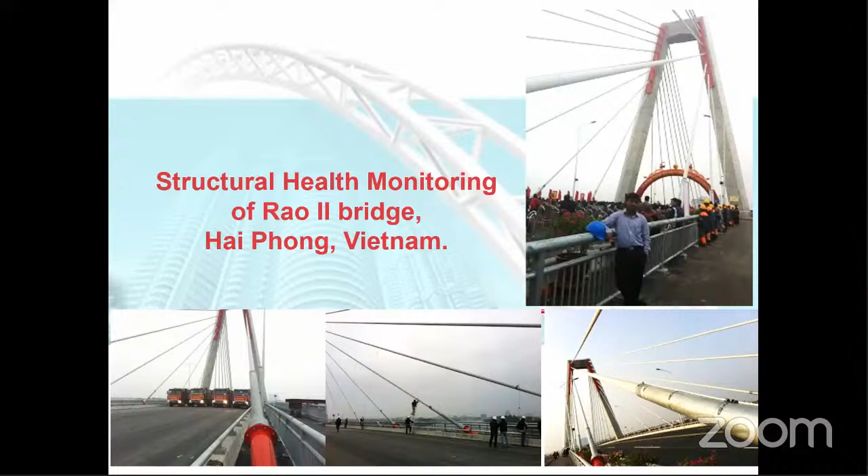So a few of the projects I've listed are the structural monitoring of Rao II bridge in Hai Phong, Vietnam, the online monitoring system for the Golden Horn Bay Bridge crossing in Russia, health monitoring of the Neva Cable Stay Bridge in St. Petersburg, the new Mariinsky Theater in St. Petersburg, and the Crusell Bridge in Finland.

A few projects in India are the load and periodic monitoring of road over bridge OB161 in Baramulla, Jammu and Kashmir, structural monitoring of a steel truss bridge with a 120 meter span at Mangalore, Karnataka, and load testing of the viaducts of metro projects to evaluate dynamic augmentation coefficients.

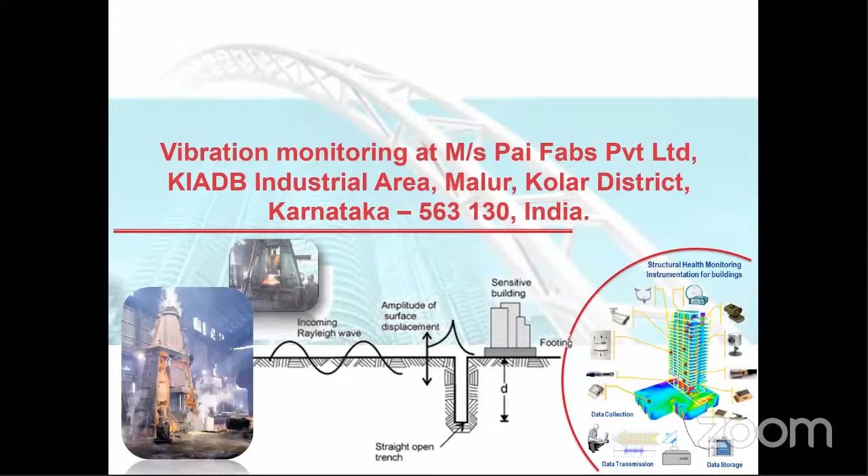Various other vibration monitoring in various industrial areas - Kolar, Bellary, and other places in Karnataka - and a few measurements abroad on human comfort.

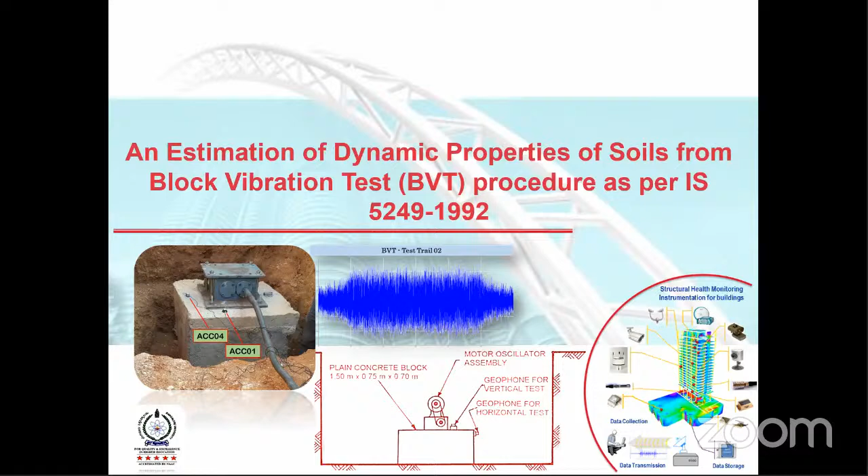It's a big business across the globe. Someday, maybe if there is one more opportunity, I will talk on this - and vibration monitoring on the effect of flow vibration due to moving vehicles on sensitive equipment in the neighboring country.

So these were a few of the projects which I could list, and in case any clarifications or suggestions are required from the participants, I would be happy to share, not just limited to this presentation, but those projects also.

So today's presentation is going to be on the structural monitoring of a bridge, specifically a case study on the significance of monitoring temperature and humidity. The outline is going to be: introduction, structural health monitoring, benefits of structural health monitoring, case study on the significance of monitoring temperature and humidity, and some closing comments.

Although the outline looks very simple, my presentation is going to run at least 2 hours long. I hope the hosting organization and department organizers would accept such a long presentation. In case at any point they require me to end, kindly let me know, and I will definitely wind it up at the earliest.

Now, as we all know, the civil industry is evergreen and ever growing. We basically build what we call the living companions to all. Now, during this COVID situation, you would have understood that the only thing that is going to be forever immortal is our civil industry, because your building is going to stand, but humans are always mortal. Civil infrastructure and construction technology have evolved over centuries, as we all know.

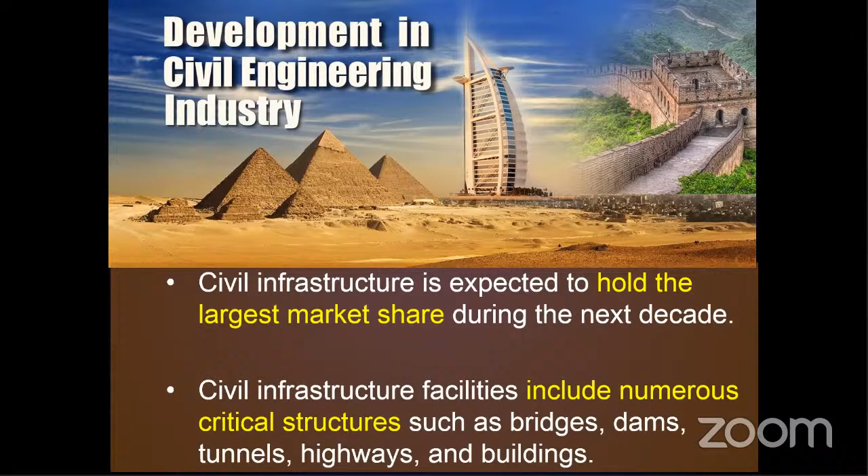So therefore, the infrastructure sector is the key driver for the Indian economy, or any other economy. Civil infrastructure facilities, as we all know, can include numerous critical structures such as bridges, dams, tunnels, highways, and buildings. Now, in the construction industry, presently we are in a state where, because of rapid urbanization, there is a need for new construction, and there is a need for retrofitting existing structures. Basically, we either need to construct new ones, or we need to take care of the aging infrastructure.

As we all know, we've been professors explaining students about most of the modern complex designs, and the structure being so complicated with a lot of materials inbuilt. The recent development in technology has enabled modern construction of structures that consist of most complex design, such as complex geometry and conditions, incorporating complex systems such as control devices, composites, built with advanced materials.

Built with advanced material quality and supported with sophisticated analysis, design, and rapid construction. All these modern constructions or infrastructures are subjected to aging, and also subjected to traffic volume.

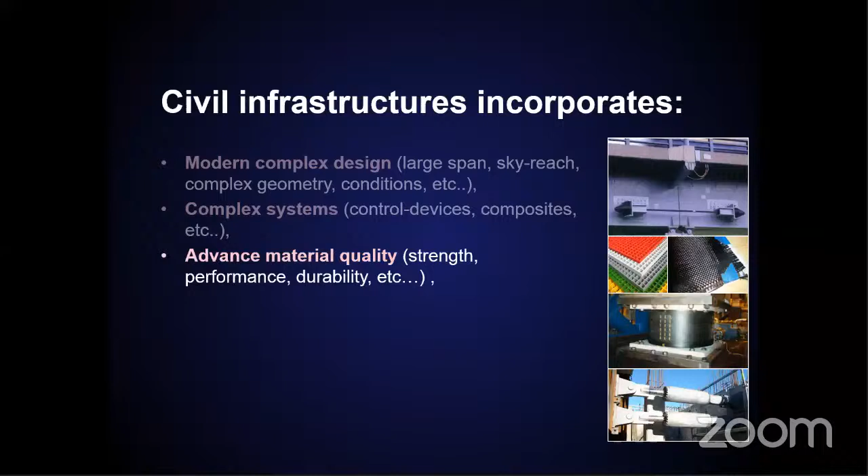You can mute him. Okay, he has muted. There is some audio a little low, it seems. Please check your audio. Okay, let me check on that. Is it fine now? Now it is okay. Yeah, fine.

So we've been able to construct the tallest buildings and the large span bridges. We are almost reaching 2-3 kilometers span of the bridge.

Now, as you all know, the globe is getting hotter day by day, and the temperature is rising. This is attributed to global warming and climatic change. This is the present day talk.

It is necessary for us to know the terms weather and climate, and these are quite different. Weather events are defined as a state of the atmosphere in a particular location at a particular time, whereas climatic change includes major variations in temperature, precipitation, wind patterns, and other environmental conditions that occur over several decades or longer. It takes more time. So that's climatic change.

Now, the climatic change is the cause for the structures to be affected, and the climate is changing because of global warming. The change in climate and weather are linked over the long term, but no single weather event, such as what we had recently, the tornadoes or the cyclone, can specifically be attributed to the changing climate. So one single weather event cannot dictate the climate. Basically, it takes a long time.

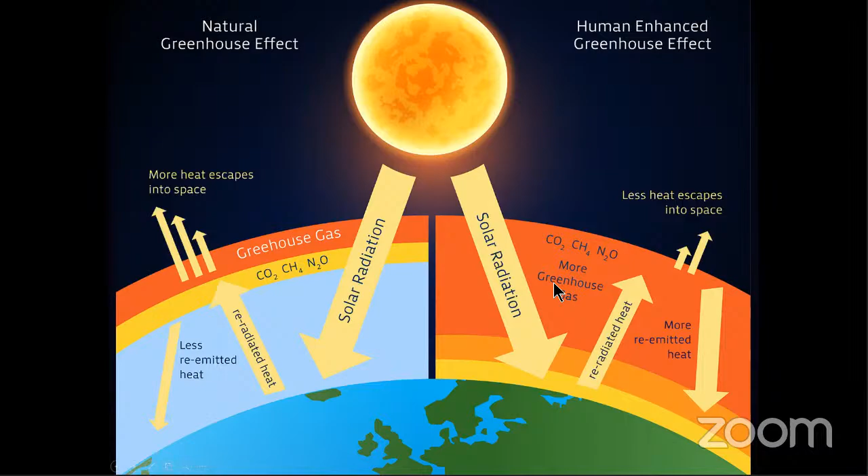Now, if you all know Arrhenius, he was basically a scientist. In 1896, he first speculated that the change in levels of carbon dioxide in the atmosphere could substantially alter the surface temperature through the greenhouse effect. He also warned that if burning coal would double the concentration of carbon dioxide in the atmosphere, the temperature of the Earth could rise by several degrees. That was the definition of enhanced greenhouse effect, the day we got to know this.

So if you can see, the sunlight passes through the atmosphere and warms the Earth. The second is infrared radiation given off by the Earth. The third is most of it escapes to outer space, allowing the Earth to cool. But some infrared radiation is trapped by the gas in the air, that is carbon dioxide, keeping the Earth warm enough to sustain life. Therefore, increasing carbon dioxide increases the amount of heat retained, causing the atmosphere and the Earth's surface to heat up. So this is all about the greenhouse effect and the enhanced greenhouse effect.

So thereby, we have a problem of climatic change because of global warming. Now, as you all know, every sector, industry, or organization is contributing to the greenhouse effect.

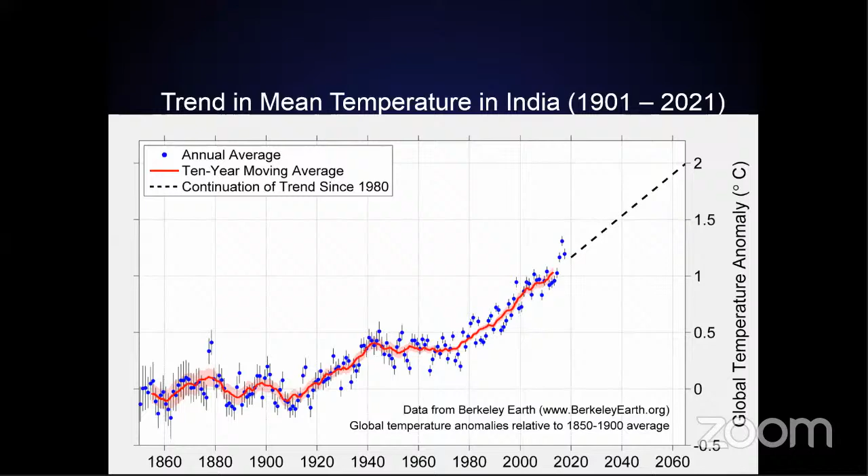This is in context to my presentation, so this basic understanding is important because we are into structural health monitoring. In health monitoring, it's not just about finding how much change has happened, but also getting into action mode, where you diagnose the problem and then suggest something. So understanding why the problem started is of prime importance.

Because of the enhanced greenhouse effect, the carbon increase, and the carbon footprints from each and every sector, we have a rise in global temperature, and thereby various effects. On the global scale, the temperature is increasing. Carbon dioxide is also increasing, which is a major pollutant, and there is also increasing acidity in the ocean water.

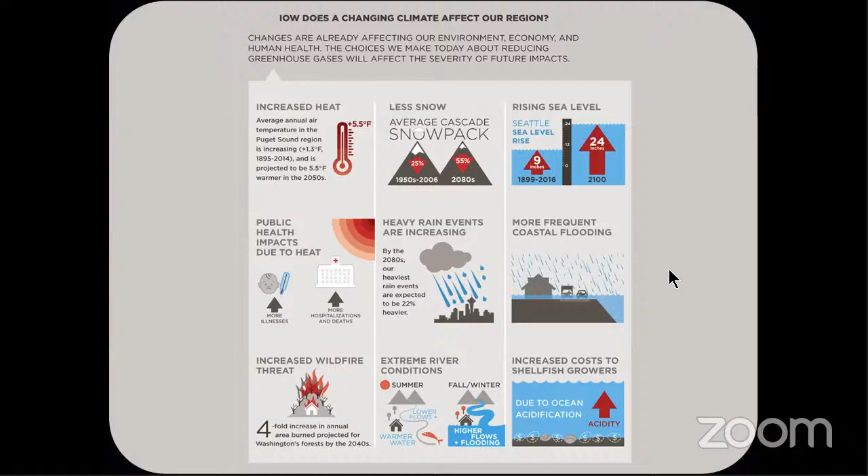So what would be our future? Because of this change, there will be lots of effects on various sectors and surroundings. There will be a lot of flooding, low snowfalls, and record temperatures. Fire risk can increase, along with landslide risk, poor air quality, and a lot of food-related illness, so airborne diseases and other issues would increase. As we all know, in the present COVID situation, that too is now being declared as airborne.

This is going to affect various regions, and there is going to be risk for various sectors, that is environment, economy, and the health sector also. There is going to be a huge increase in risk involved in cost, and this would be ever growing.

We all know that because of temperature, there's going to be severe drought. Because of water and temperature, we have extreme precipitation events and coastal flooding. And because of temperature, there's going to be heat waves. We have the strongest evidence because of scientific findings. There is also some evidence on water plus temperature causing tornadoes and hurricanes, which has been extensively studied in recent days.

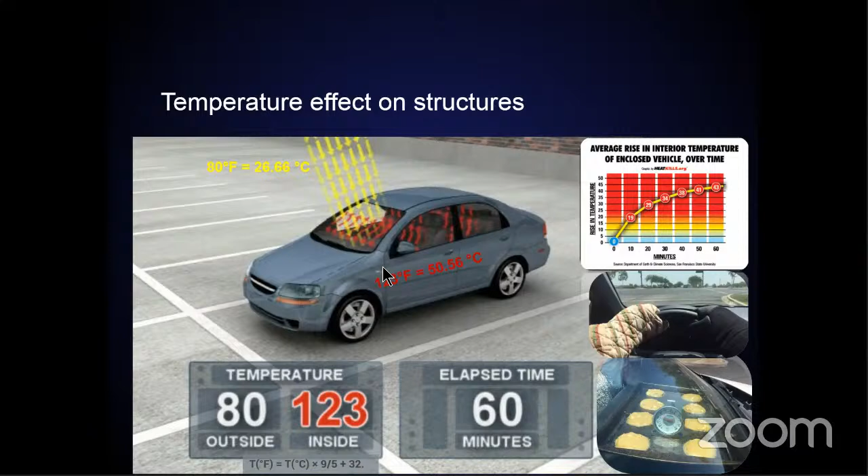Today we are in a situation wherein the temperature is quite high, and there were a few things floating on social media about cars getting melted in a few countries—various components of the car being melted. If you fact check that, it's just damage caused close to a construction site which was subjected to some fire. But still, from a civil engineering point of view, whenever there is a fire in an adjacent building, it's going to affect the building next to it.

So although the news is fake, it's an eye opener for civil engineers or structural engineers—when a neighboring structure is affected, definitely you're going to be affected too. That doesn't mean it was just gossip or something, but you need to keep yourself safe and in check.

Because of various phenomena—the enhanced temperature or harsh environment—and because of the aging factor, these two factors cause infrastructures to deteriorate. This is not just a problem specific to one particular nation, but it is a problem across the globe.

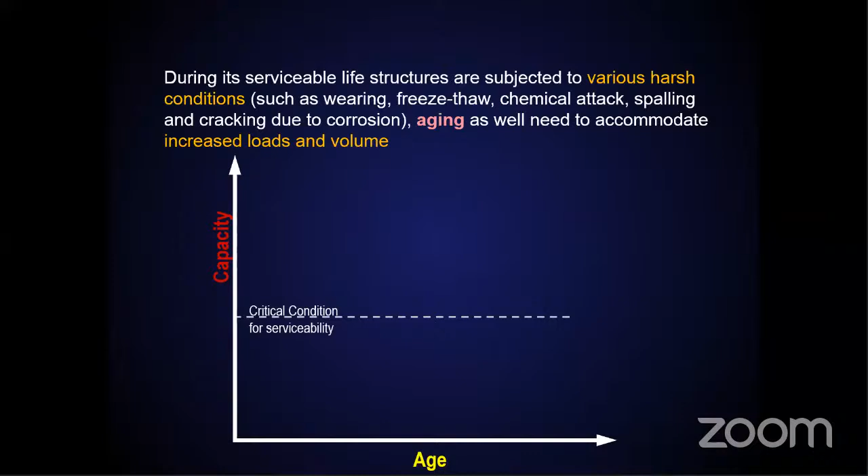Aging is definitely a slow process that also deteriorates structural capacity. The loads clearly show a tendency to increase over the lifetime of the structure. However, if the applied load increases continuously, the deterioration would occur faster. So if the load increases in an accelerated way, the deterioration is also going to be accelerated, or get faster.

The load is never constant, and the capacity is never constant, because capacity decreases with age and also on the rate of loading—it is always changing. Whereas the load is always variable, totally uncertain. So whenever there is variability and uncertainty, these parameters can be best represented by the probability distribution.

So on the probability distribution curve, if you take any point, as time progresses, the demand exceeds the capacity, and it is evident that the time-varying probability of failure increases.

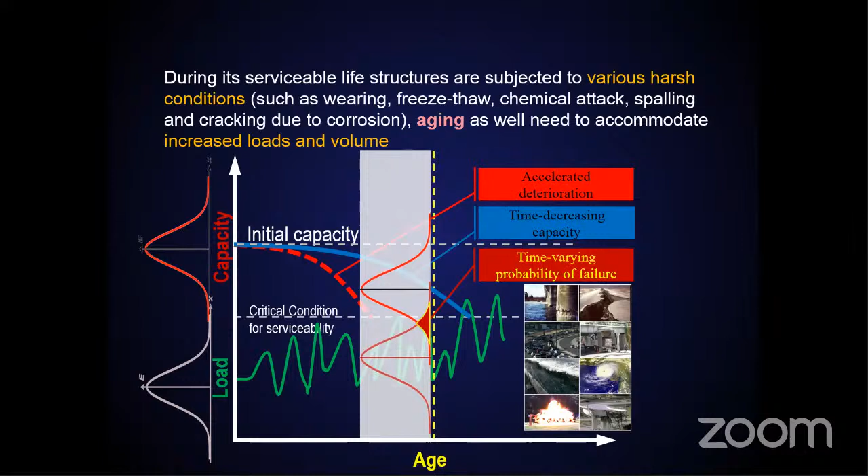The design must guarantee the performance—that is the functionality, strength, and durability—which is dependent on time. Structures in general are intended to perform safely during their design period. When a structure enters its service, it is close to perfect, or in agreement with the engineering expectations of the day. Over time, the structure loses part of its initial capacity, and there is going to be cumulative damage over a period of time.

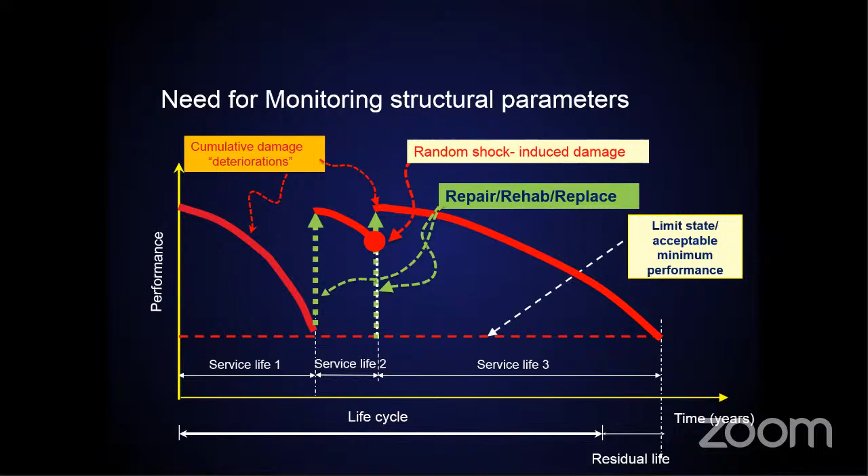As you can see, there is numerous uncertainty involved in every phase. So what is that uncertainty? The X and Y parameters. If you look at the X and Y parameters, you are not definite at what time the rate of deterioration would lead to the decommission of this particular structure. On the Y-axis, what we have is the performance - we are not aware up to what point it will perform after it is designed, and the rate at which it falls is also uncertain. There is total uncertainty.

So in order to extract knowledge on understanding, or to understand how this deterioration takes place, there is a need for information. This information is basically obtained from data that are collected from these structures. In the present day, there is reactive based maintenance, which is still a reality. The preventive, or the time based, or condition based is still not being practiced - in a few cases it has been practiced, but not completely.

The predictive or forecasting based approach is still the need of the hour. So all this predictive, or forecasting based, or condition based approach is dependent on the data that is acquired and the information that is obtained in context with that particular situation. Now, therefore, there is total uncertainty.

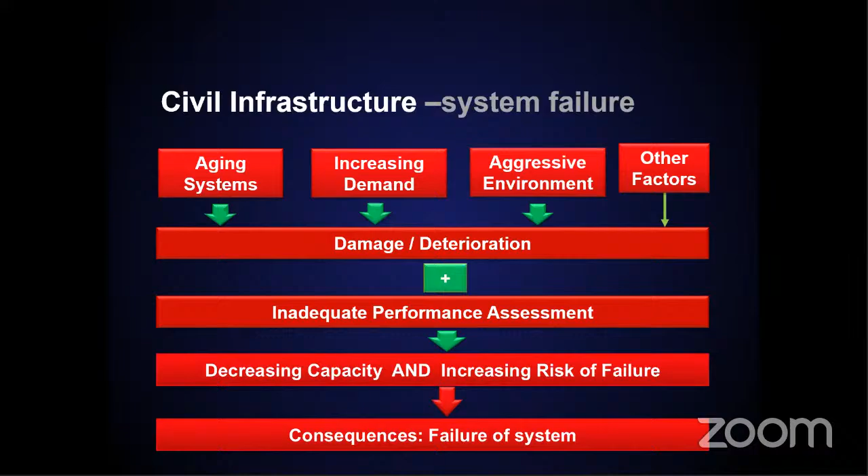Now we have to understand what is the failure of a system. If there is low uncertainty or every factor is taken care of, the failure of a system could mean the suboptimal performance of a system. If the uncertainties are not accepted or considered, and various factors are affecting the structures with inadequate performance assessment and a huge risk of failure, we say the system can also collapse, or there could be extreme failure of the system. So the definition of failure of a system depends on that particular situation.

Now, as you all know, for any engineering problem, obtaining reliable data is always the first and fundamental step towards finding a solution.

Now what we need is more information, and with information we get knowledge to understand the failure. The failures that are already there, or the failures that we have understood over a period of time, and their analysis will also lead to new insight and help us improve designs of future structures.

Now, monitoring structures, which is the present day talk of mine, using sensor technology is one way of getting quantitative data about the structure and other parameters that encompass the uncertainty, and help us take informed decisions about the health and destiny of the particular structure.

Now, as I said, structural health monitoring is an emerging vital tool to help engineers improve the safety and maintenance of critical infrastructure. The objective is to lower the maintenance cost and increase the reliability of the structure.

Basically, it's presently been accepted by the majority of the civil engineers fraternity as a potential method of assessing the condition of the structure. The development of structural monitoring technology is basically for surveillance, evaluation, and assessment of existing and newly built structures, and it presently has attained some maturity, meaning extensive research has been conducted and it is being implemented on site.

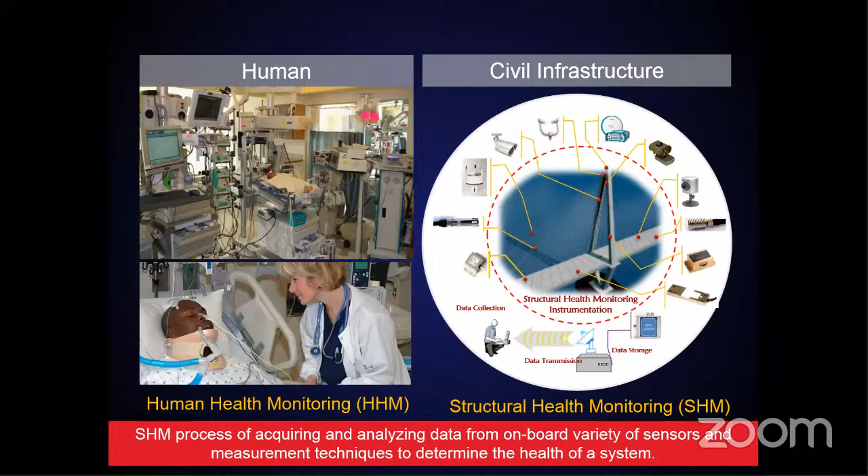Nowadays, everybody is aware of what is meant by monitoring, because we've been constantly monitoring people, and the media is helping us monitor. Even if you're in a very bad state or a good state, you try to monitor so that you are always in a positive state of mind.

Now, as you all know, the parallelism between medical activity and SHM is that there are different phases of life. The birth monitoring, during the birth you go for monitoring, and that's called process monitoring. Health checkup, regular routine health checkup, whether you are in sound health or not - the same type of monitoring can be done. And when you're in deep illness or close to death, there is something called clinical monitoring, and there is a damage monitoring when it comes to the structure. So that's the parallelism that could be understood from the medical activity and the SHM.

Now, the benefits of SHM are various. You can look into various literatures that give you the benefits, but I've tried to bring a few of those so that those people who are very new to SHM could understand. I've made my presentation in such a way that all are benefited, from students to those in the advanced levels of understanding monitoring.

So monitoring reduces uncertainty because it takes care of various parameters that have been monitored. You can also discover hidden structural reserves that were not taken care of in the designs, discover deficiencies with time, and increase safety. This can help buy some time as well as increase safety.

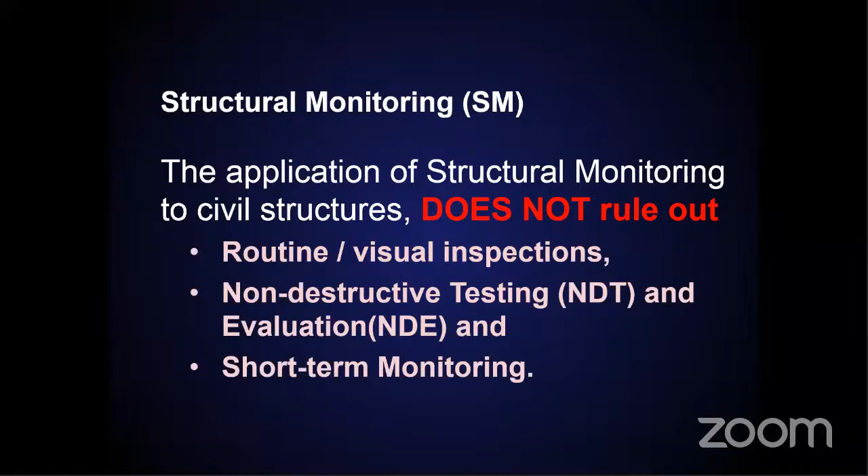Now, the application of structural monitoring to civil infrastructure does not rule out the routine things presently practiced in the industry — that is, visual inspection, non-destructive testing and evaluation, and short-term monitoring. There are various terminologies presently noted by various industries and extensively used by people, but all mean the same, and each has its own specific objectives.

And the terminologies are non-destructive evaluation, structural monitoring or measurements, structural health monitoring, condition monitoring, and damage prognosis. Now, each monitoring project has its own peculiarities, and although it is possible to standardize most elements of the structural monitoring system, each application is unique in its own way, and they are combined.

So since every project is unique and peculiar, you try to combine these and make the topic. For example, in the present topic, I've made it structural health monitoring of structures and the significance of monitoring temperature and humidity. Therefore, that doesn't mean I'm an expert in the various other fields.

It doesn't mean that I am also aware of other things. This particular field has its own wings. The few people who have worked on certain projects could only talk on those projects and would be expert in that project. But it's quite a complex and vast subject. So whenever you get involved in a particular project, you try to know much on it, and it gives you a basic idea of the other monitoring schemes.

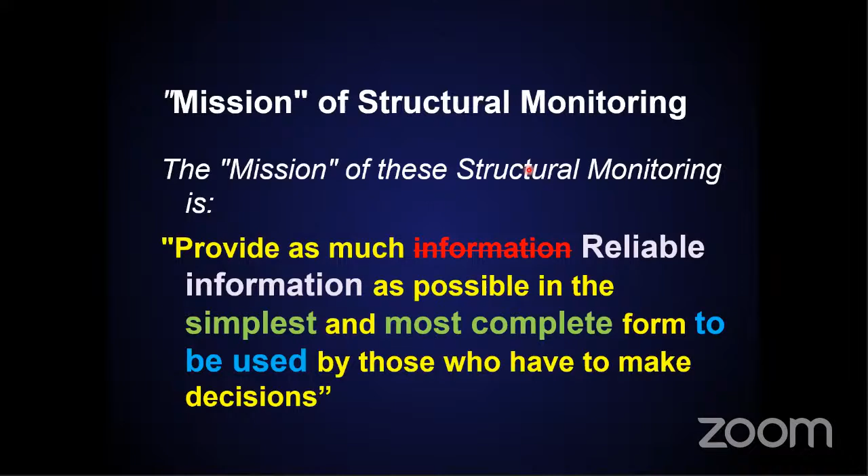So therefore, now what we need is not just information, but reliable information from a reliable source. You need to also have the reliable system in place and expertise. I think that would help you understand the seriousness of structural health monitoring. It is not just to provide information, but to provide reliable information, as much as possible, in the simplest and most complete form to be used by those making the decisions.

Now, as seen from the previous slide about the health monitoring of a critical patient, the decision making may arise similarly in structural health monitoring or structural monitoring of civil infrastructures. And for that, the essential features of a structural monitoring scheme, or structural monitoring technology or devices, includes...

...reliable and economical instrumentation. That's prime important, because economy is the most important thing that allows wide implementation of the instrumentation. Accurate signal processing, expertise with knowledge and skill in the information process. The success and effectiveness of each tool for the project depends on the availability of reliable data. So although you have everything in place, we still need reliable data. That also plays an important role.

So on the whole, you need to have the best things in place, and not just knowledge, but also the skill sets. Now, the components of the structural monitoring scheme, I would try to go fast because these are the basic things. So from henceforth, I'll be a little faster. I'm getting back to my case study and I'll go slow over there. So now, as you can see...

...the modern structural health monitoring system will typically consist of six common components: the structure or system that needs to be monitored, the sensors placed onto the system, the data acquisition system that acquires data from the sensor, the data transfer and storage, the data management, data analysis, and diagnostics.

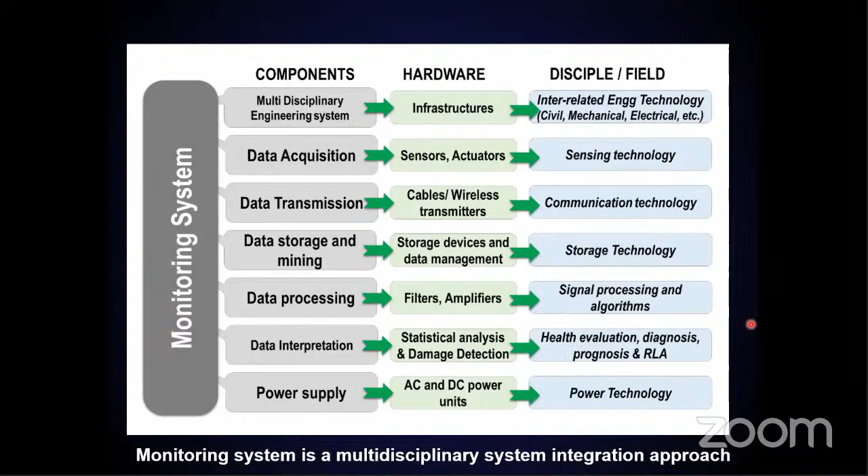Now, the first component is the structure. Most of the questions that will be asked is which of the structures can be monitored. As I told, having been presenting in various conferences, I've been asked to define a few of the basic things, so I try to include this.

So practically, we can monitor any of the structures, be it new, old, micro, macro, or to any scale. It could be on Earth or in space. It could be a single structure, a complex set of structures, the whole city, or anything. It could be a temporary structure or a permanent structure. So practically any structure can be monitored.

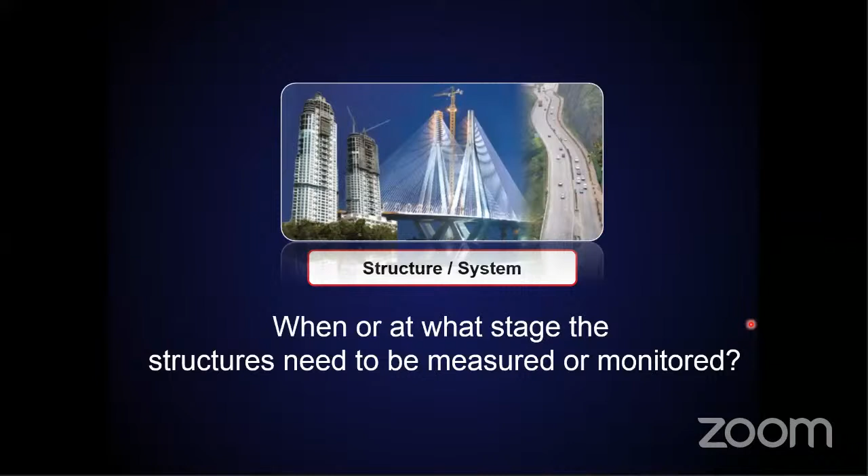At what stage do we need to monitor? As in the case of health monitoring, we can monitor at the happy stages, and when you're really worried, you go for diagnostics. Sometimes when you're critically ill or in a very bad state, you go for monitoring.

By the same analogy, you can monitor structures at any stage, beginning from the design stage, model testing stage, construction stage, commissioning stage, in-service stage, maintenance stage, retrofitting stage - before and after retrofit, to check whether the retrofit is effective or ineffective - and the mobilization stage, when you mobilize a structure from one place to another or lift it from one level to another. You need to monitor every component if there are any stresses induced, so you monitor before and after it's mobilized.

For demolition, whenever you go for a demolition, you need to see whether the surrounding environment is affected, whether the structures surrounding it are affected. Therefore, you need to monitor before and after the demolition.

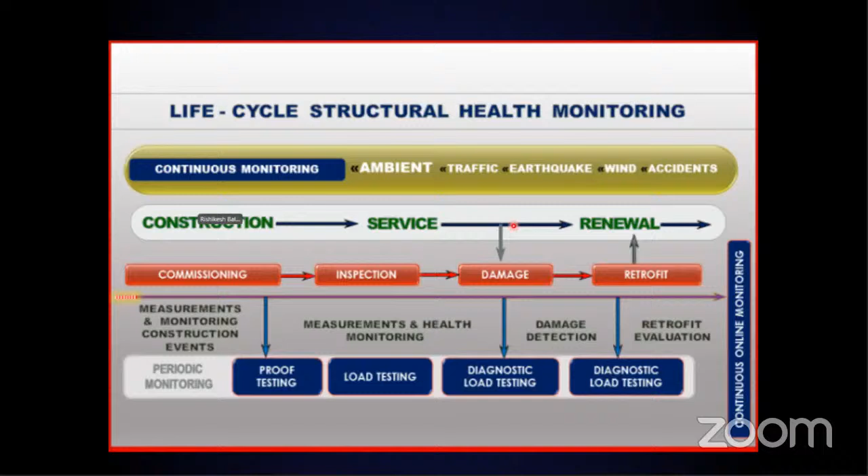Now, which of the components or sections of the structure need to be measured? You can measure the whole structure, or you can measure one component of it. Measuring the whole structure is called global monitoring. When you consider a portion of a structure and monitor it to understand its local behavior, that's called local monitoring.

The second thing is sensors. What is a sensor, or what types of sensors are available? Electronics students are very much aware of it, and nowadays every individual knows about sensors because of smartphones, which have various sensors. By definition, a sensor is a device for sensing a physical variable of a physical system or an environment.

Sensors are there to collect data. They sense changes in the physical variable of a system or environment that could lead to damage. Understanding damage is very important. Damage is defined as a change introduced in the system which adversely affects its optimum functionality, either currently or in the future. So damage is basically a change introduced into the system that adversely affects optimal functionality, whether it's a change in material property, geometrical property, boundary conditions, or system continuity. The sensors sense the data, and the change in that data defines the damage.

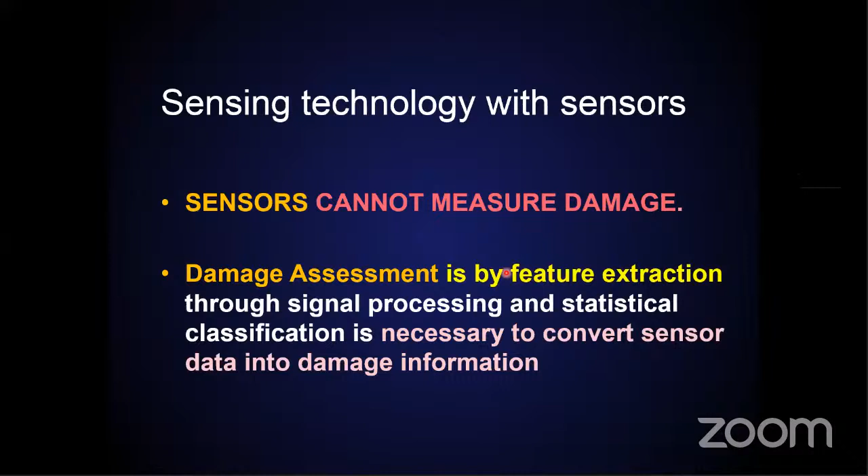Sensors must fulfill the A to E characteristics, as follows: Accuracy—the sensor should be reliable and accurate. Benefit—it should have the benefit of being economical, cost-effective, and compact, as small as possible. Durability—the serviceability of the sensor should be durable. Express—meaning the data operation and accuracy should be fast, high rate, and provide real-time measurements. And once dealing with civil infrastructure, it should also have an adequate service life equal to that of the infrastructure.

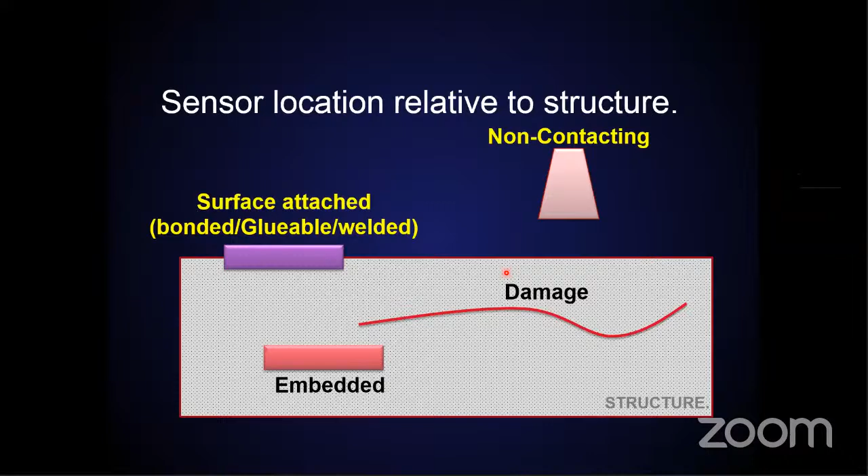The types of sensors available in the market can be classified as surface attached—which could be glued, bonded, or welded—and as contact or non-contact. So you have contact sensors which are surface attached, and some are embedded, or embedded at a specific region, such as at the site of damage, expansion, or a crack.

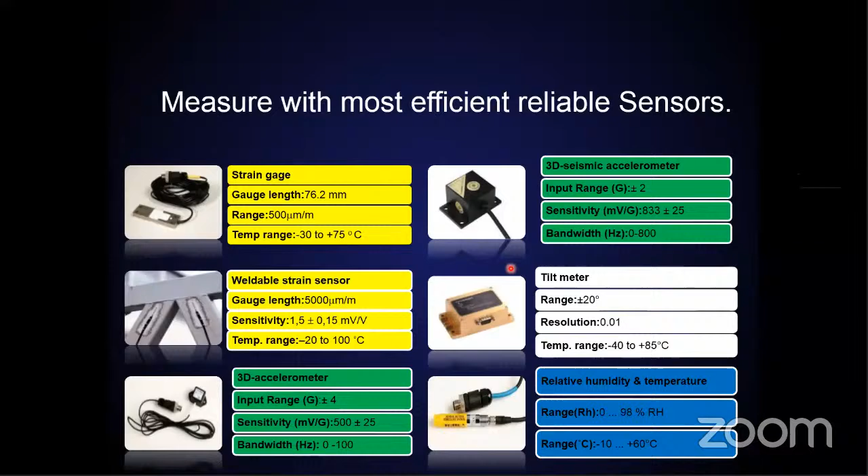The conventional sensors are electrical signal based, basically traditional electronics based. They are surface bondable, gluable, weldable, clampable, boltable, concrete embeddable, and composite embeddable. These are the conventional type of sensors available from various suppliers, and these are a few of the sensors I've been using extensively in my earlier projects.

Now, the conventional sensors have limitations in evaluating the long-term behavior. They are very sensitive to electrical noise, and this noise doesn't allow you to understand the signals properly coming from the sensors, and this is always an issue. Also, these sensors degrade with age, and presently fiber optics are identified as the most suitable for health monitoring of structures.

As you all know, the telephonic lines are being converted from conventional lines to fiber optic lines. The flow of data is quite reliable and fast, and the rate of data transfer is also increased.

Now, the advantages of fiber optic sensors are electromagnetic interference immunity. Basically, electromagnetic radiations do not interfere and do not create any noise. It is lightweight and very small, as you know, very small in size, like a hair.

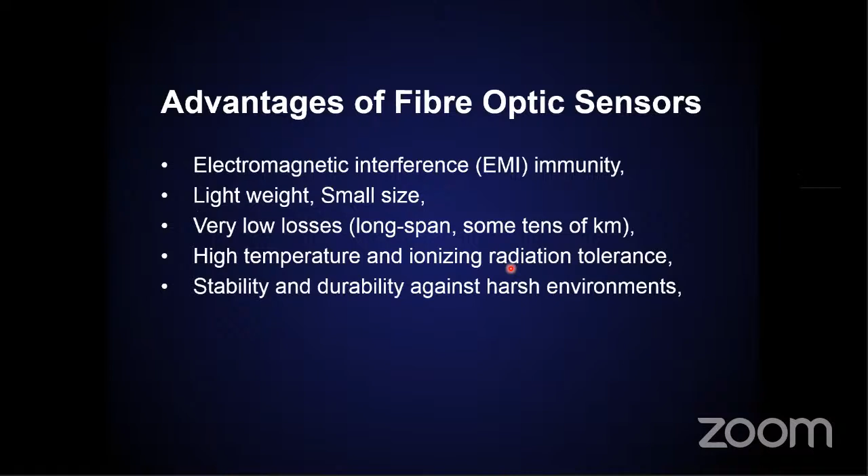Very low losses over long spans, maybe going to tens of kilometers. High temperature and ionizing radiation tolerance, stability and durability against harsh environment, no local electrical power required at the measurement point, high resolution, high bandwidth of signal, and high sensitivity.

So fiber optics are also commercially available these days, and they are also classified based on surface bondable, gluable, weldable, boltable, clampable, concrete embeddable and composite embeddable. Based on your particular situation or project, you may have to define what type of sensor you require, and there are suppliers who will definitely suggest or help you understand the sensor and its limitations, as well as give you the right consultation.

Now, how many sensors to be installed is one more question. It depends on the requirement, and it also depends on the budget and the time. The budget always depends on the resources, and the resources include the materials, the people involved, and the time involved. So the higher the resources utilized, the higher would be the cost.

Because the data coming from the monitoring scheme is going to be humongous, very large. So the definition of the levels of sophistication can be described in various levels: level 1, level 2, level 3, level 4, and level 5.

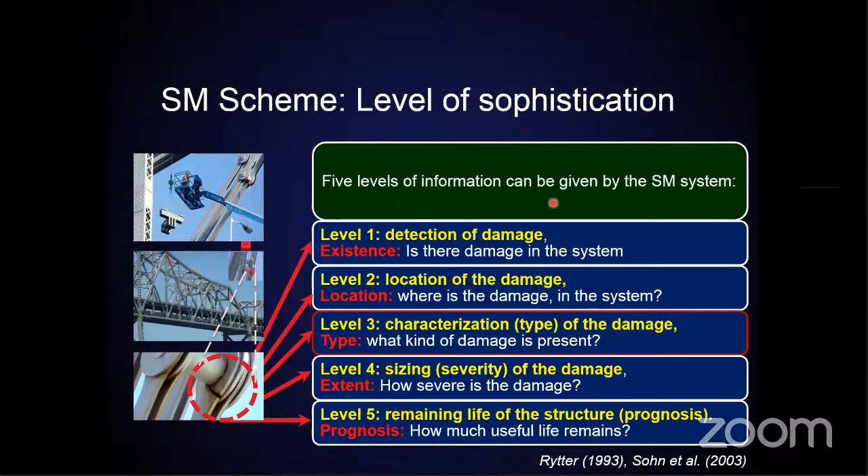So now you can see most of the bridges that have been worked on are in level 1, and a few are in level 2, but definitely not practically. I've never worked on a structure that goes to level 3.

Today we can afford to deploy few sensors onto the structure because of reliable sensors, but the number of cables and resources required for structural monitoring makes it a huge task given the limited budget. With very few sensors at level 1, you can just get an indication of whether there is damage within the structure, a little warning on whether the structure is performing or not performing. It could give you an answer to that.

Whereas when you want to put more sensors to get a more complex analysis of the structure, the level of analysis is quite high, so the number of sensors goes up, and more advanced algorithms are required. More data comes in, and it takes a lot of time, which becomes a costly affair. Definitely this is a doable job, but it depends on the situation where it's required, and the need for it.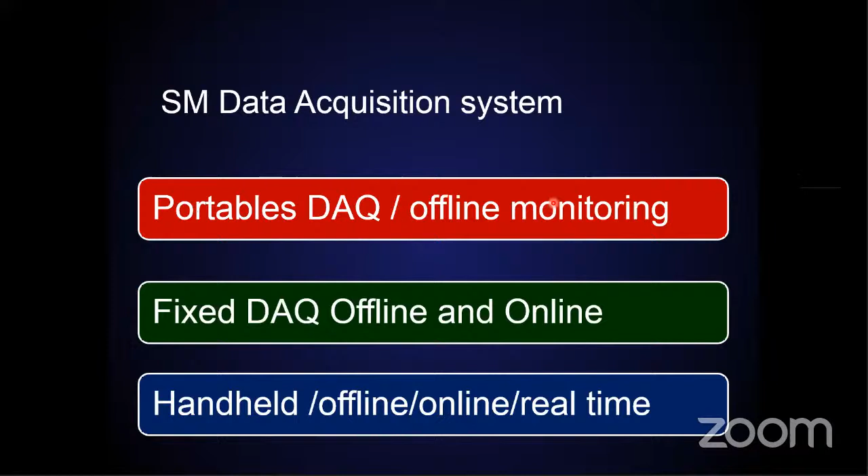The third component is the data acquisition system. Data acquisition can be classified as portable, fixed, and handheld, or defined as online, offline, real time — these are the various classifications. In the market you get data loggers, data acquisition devices, and data acquisition systems. The classifications and their benefits are shown here, but I'll skip these slides and just introduce you to the systems.

These are a few systems that are portable, handheld, and online monitoring systems permanently installed onto structures — I've been working with these systems. Data transfer always happens through cables and the network of sensors. Sensors are networked to the data acquisition system, which, being centralized, will also transfer the data to remote servers.

Basically you have a centralized data acquisition system with a parallel connection to the sensors, and this type is used in labs and small projects. But for large projects, with a minimum of 20 or maybe 10 sensors, the number of cables running onto the bridge itself becomes quite high.

If you're monitoring a small, very flexible system within the lab and trying to monitor damping, because of the weight of the cable and the sensor itself, you won't be able to get accurate results.

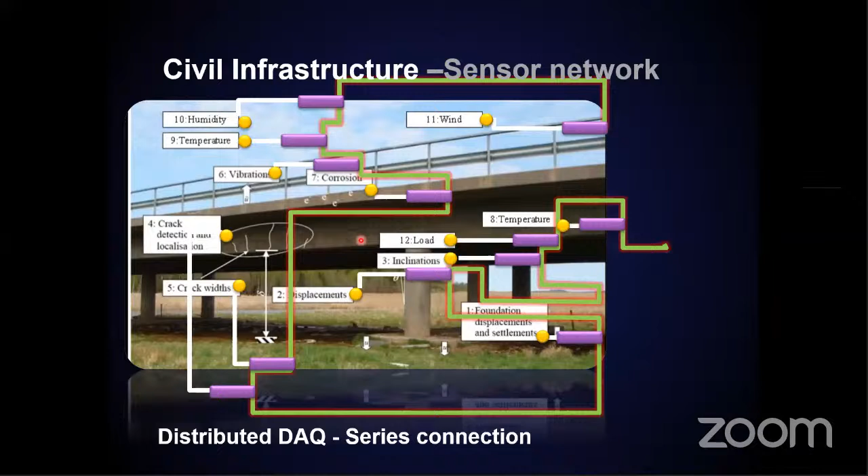This type of instrumentation has been developed, and now there's also wireless technology, where at every sensor you have a node, or a distributed DAQ or data acquisition unit placed very close to the sensor itself, which transmits the data to the remote server or remote station.

Therefore, the data gets stored. You can have various types of networking — it could be cabled or wireless, and there are different types of wiring: fiber optics, normal coaxial cable, shielded or unshielded.

So there are various types of wired and wireless networks that have been extensively used, and you can go with various combinations of networking. Basically, these data are networked, and then transferred to the data acquisition system. From the data acquisition system, it moves to the remote station.

So there's the bus topology or series networking DAQ, which I previously worked with in my previous company, based on networking sensors in series, which has its own advantages and its own limitations. This was extensively used, and most of the projects I'm going to talk about today have used this type of networking scheme.

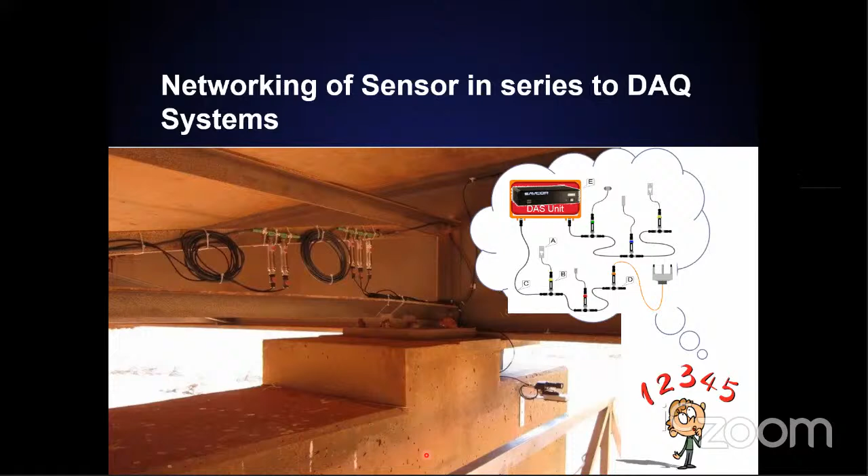This is inspired from the networking scheme in fiber optics, where in the fiber optic scheme you have multiple sensors in one single strand. You have multiple types of sensors, as well as multiple sensors in one particular strand, and that can be monitored over a long run.

So how much data is collected? As you all know, we have two situations presently in structural or civil engineering infrastructures. First, the structures are very large, so the number of sensors is going to be quite high, and because of that, we have a large amount of data coming from sensors spread across the whole infrastructure.

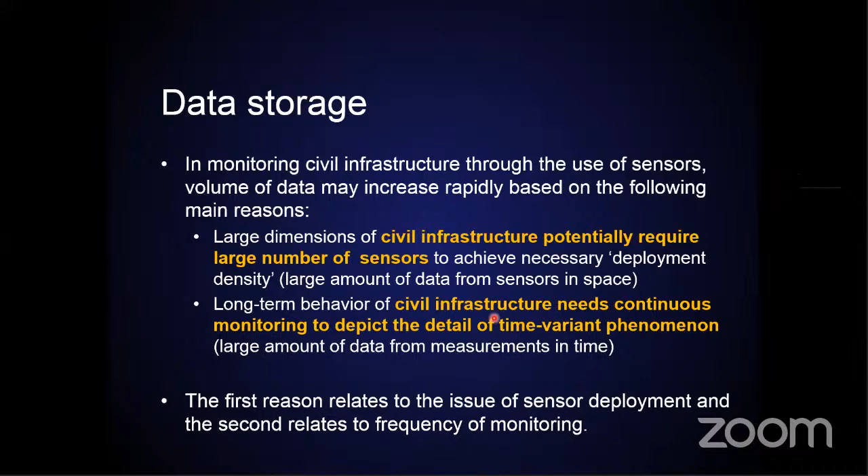Now both of these raise two issues. The first relates to sensor deployment, that is, more sensors deployed onto the civil infrastructure. The second relates to the frequency of monitoring - we need to monitor continuously at a particular rate, and the data has to be collected for a longer duration. So how much data is stored?

That's the huge thing. These days we're in 5G technology, and data transfer is almost 100 times compared to 4G. But where is this data transferred? Your phones these days have much more memory, and photography resolution has increased - you have a 48 megapixel camera storing each picture at about 13 MB or so. Similarly, when you have a high rate of data, meaning high resolution data, the number of data points transferred per second is high. Therefore the storage also increases, and humongous data storage is required.

So for data storage, if we take a present day situation, the maximum bit depth is going to be 24-bit, though practice in labs is usually 8-bit or 16-bit. Here we have high resolution bit samples of 24-bit. Let's say there's one channel - x-axis vibration data - being monitored for about 60 seconds, and per second you're collecting 100 data points, called sampling. So per second you collect about 100 samples, and you can see how much data is being stored.

So I'm collecting the samples, 100 samples per second, and you can see per minute, every 60 seconds, that gives you 17 kilobytes, almost 18 kilobytes.

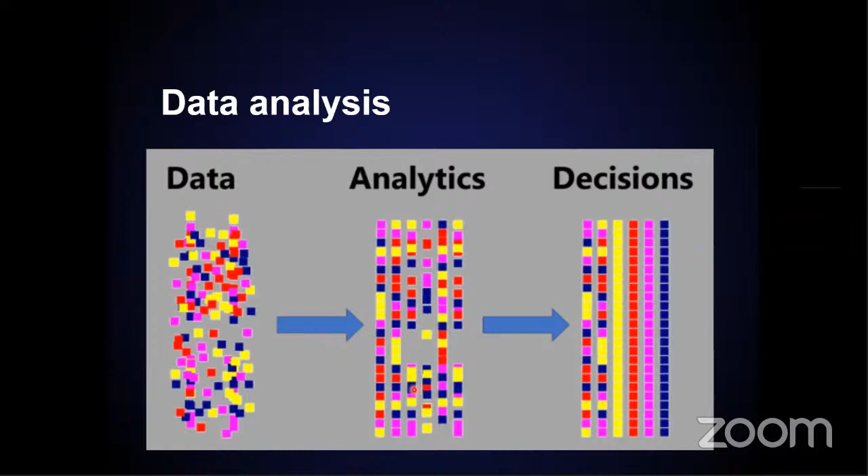That falls after analytics, into data visualization, which needs to be simplified. Your end user, or the people who are going to take decisions, or people who want to get into this business, like those looking into the seminar—I'm not providing you all the basic raw data as we did earlier, but rather data that is simple to understand, so you can make your own interpretation.

Many things come into play when doing structural health monitoring business. So next is data visualization. As I said, it has to be as simple as possible, and the large amount of data should be captured in the most simple way, so you get the most complete understanding of that particular situation.

Utilizing the structural monitoring tool gives you more time to focus on data interpretation, evaluation, and action, with less time spent acquiring it. With the traditional approach, you need to go onto the site and collect the data, then at specific intervals keep monitoring, a calendar check. You need people moving about getting that data, which takes up a lot of time. But these days, implementing structural monitoring schemes gives you more time for data interpretation, evaluation, and taking further actions.

So basically, let's say you have a particular situation where you need to monitor the temperature, strain, displacement, and speed. You will select a few sensors from an expert who is an expert in sensors, and you deploy that. You'll get a structural monitoring expert who will try to give you a complete package, and thereby you get the data on site, onto your particular server or drive.

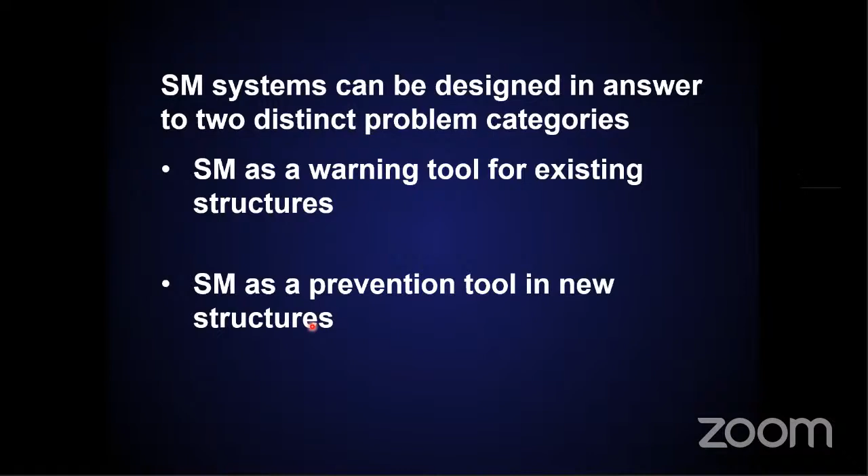So basically, the structural monitoring system can be designed to answer two distinct problems for the present day. It can act as a warning tool for existing structures if you try to provide these structural health monitoring systems onto the structures. So it works as a warning tool if it's already constructed, or for those structures still in a healthy state, it can also act like a preventing tool in new structures or existing structures. Therefore, these structural health monitoring systems can act as a tool, and this is definitely going to be the best way forward for the sustainable development of civil infrastructures.

Now, the significance of monitoring temperature and humidity. So now I will touch upon this particular topic. The temperature and humidity sensors are the most commonly used environmental sensors in any structural monitoring scheme. All this while I was talking about what a monitoring system is. Now I'm going to look into only two specific things: temperature and humidity monitoring. This is extensively used in most projects, and I've been using this particular technology way before.

Now, humidity sensors are also sometimes called hygrometers. Whenever you're monitoring structural parameters, you have two types of temperature in structural engineering or civil engineering: the ambient temperature, which is the surrounding or surface temperature, and the structural temperature. Structural temperature could include the core temperature or the surface peripheral temperature, that is the outer part. When the sensor is in contact with the body of the structure, then you are acquiring the structural temperature.

As you all know, climatic change is always rapid. The weather change, or the temperature of the ambience, changes drastically and is quite dynamic. Whereas the fluctuation of structural temperature is slower, and in the core it is relatively constant.

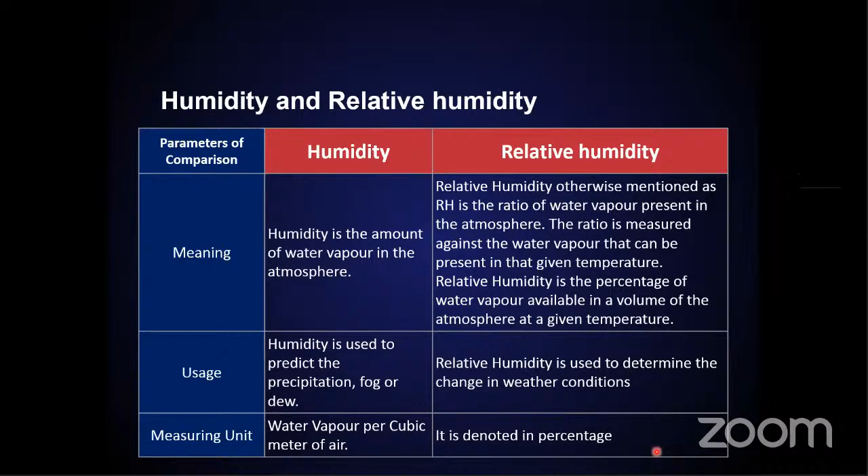So relative humidity, otherwise mentioned as RH, is the ratio of water vapor present in the atmosphere. Most of the time we monitor relative humidity, and it is used to determine changes in weather conditions. Humidity is measured as water vapor per cubic meter, whereas relative humidity is measured in percentage, and you will also see measurement in temperature.

During the COVID-19 situation, all of us have understood the importance of monitoring temperature. Thermal screening had taken place at every corner and every individual house. Thermal scanning at every security check and thermal screening are the first step to detect fever, and the first preventive measure towards isolation.

Once a case is detected, constant monitoring of the isolated person is important. So this is the importance of temperature monitoring. Temperature monitoring has really helped people understand whether they're COVID positive or negative, and how well they're coping when in isolation. This is what we understood during the COVID situation.

But if you look at the widely searched, extensively researched temperature issues during COVID-19 lockdown, one of the most searched things was the ideal temperature to cook chicken in the oven. Most of my friends who were locked at home during COVID knew the importance of monitoring their temperature when sick, but few of them were actually sick—they were quite happy being isolated. Yet the search engines showed that the most searched temperature topic was the right temperature to cook chicken in the oven, because most of them wanted to become good cooks.

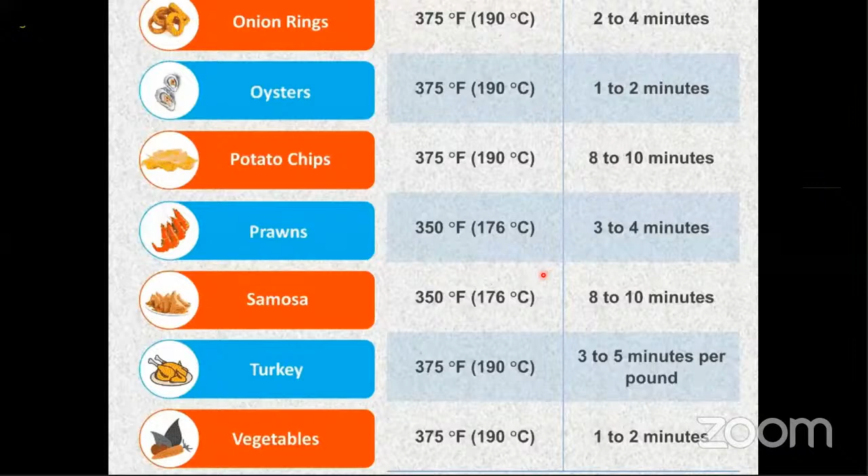I would emphasize looking into the importance given to temperature. When you cook at the right temperature, you get the right dish. If you don't cook at the right temperature, you won't get the right dish. Similarly, if you don't try to monitor temperature, you will end up elsewhere.

So temperature monitoring is very, very important. Now, temperature measurement is not new to a few of us. We were in the 90s, there was a movie called Predator. Temperature monitoring was done by these aliens.

The scanning of temperature was done by this alien on the captured human being, so it could sense, it had the infrared vision or infravision. So I will just run through the clip. You can see that in the COVID situation, as you all know, most of it were asked to go for the scanning, but this scanning is not new to those people who have seen this movie, so they would have understood.

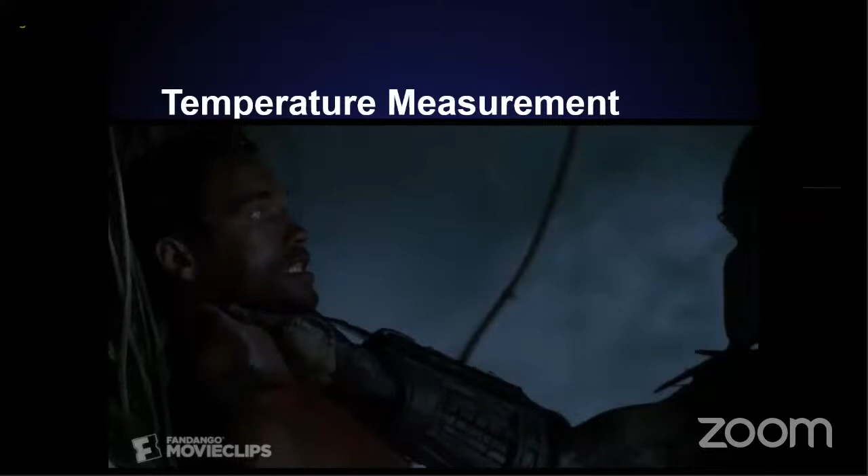So you can see that the person is captured who is not COVID infected. This is a movie in 1990s. You can see the alien is trying to scan, and that's the temperature scan of that particular person. Now, this is not new to us. So this is the way we wanted the scanners to be. So this was introduced in a 1990s movie.

Now, the present day situation is that initially few people were grabbed and they were scanned. And progressively, most of them volunteered themselves to be scanned for their temperatures. And presently, we are all automatically scanned for temperatures. That's the situation we are in. So slowly we are progressively moving towards automatic scanning for temperature.

Similarly, the structural health monitoring is getting automated, meaning sensors are implemented in the structures, and they're being automatically scanned over a period of time because of these low cost IoT technologies. Now, the monitoring devices and technologies have improved over time, and temperature measurement, which was earlier quite different, is now becoming faster, accurate, and smart.

Now, you can use your smart mobiles with an attachment to it. You can also screen the thermal ambience also. So this has been extensively used in various schools abroad and in most advanced schools.

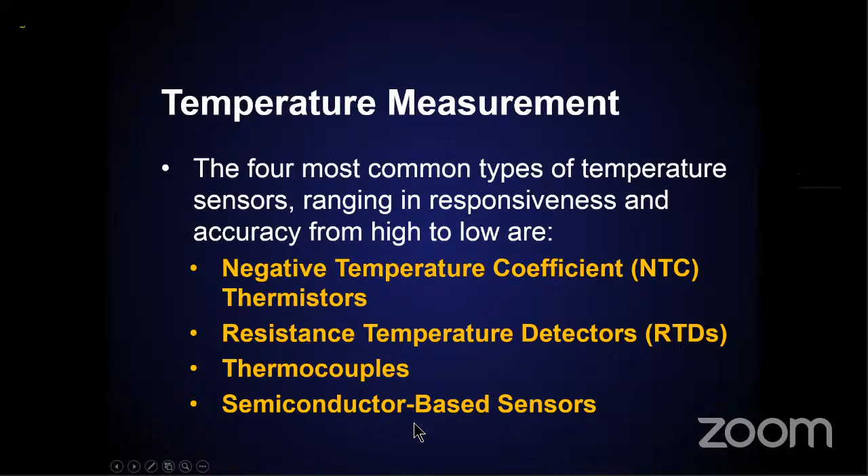So when it comes to temperature measurement in civil engineering, the most commonly used temperature sensors are those like thermistors, thermocouples, RTDs, and IC-based or semiconductor-based sensors. Now, the slides provide you the various advantages and disadvantages of using various types of temperature sensors, but the thermocouple and the thermistors are extensively used, as you can see, in most of the products.

Now, when it comes to humidity sensors, there are three common types. You can talk to some of the electronic guys or the sensor department, they'll give you a complete understanding of these and their limitations. So capacitive, resistive, and thermal based sensors are extensively available, and presently available in the market.

And the development of the humidity sensor is going at a faster rate. And you can see these are the data that I've got from those people who are working in this sector, and there is a huge development taking place on this particular sensor. So that has been extensively used, that is the humidity sensor.

So you have the various types of sensors. It could be optical based, acoustic based, and electronic sensors. So we see most of them are still in the development stage, and few of them are already in the market.

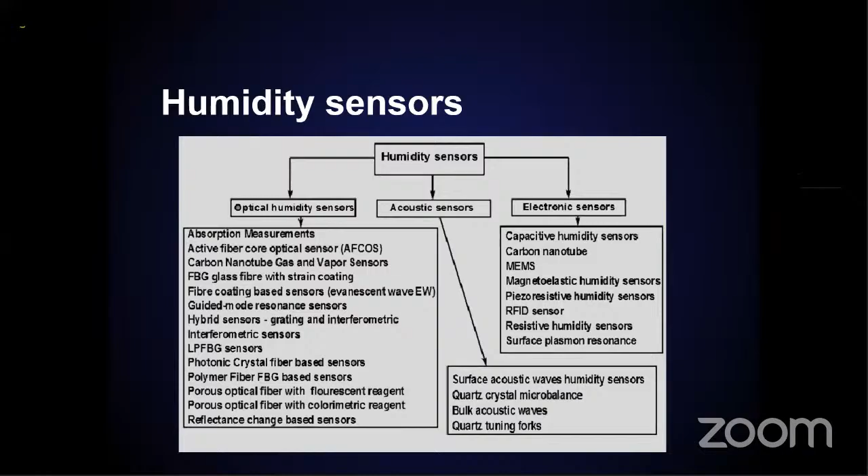Now, most of the time, the temperature and the humidity are measured together. So we know that in a COVID situation, we used to measure the temperature, and humidity is measured in most of the situations and most of the places in order to have complete ventilation, aeration. So therefore, both of these combined also help you in understanding the potential effect of heat index.

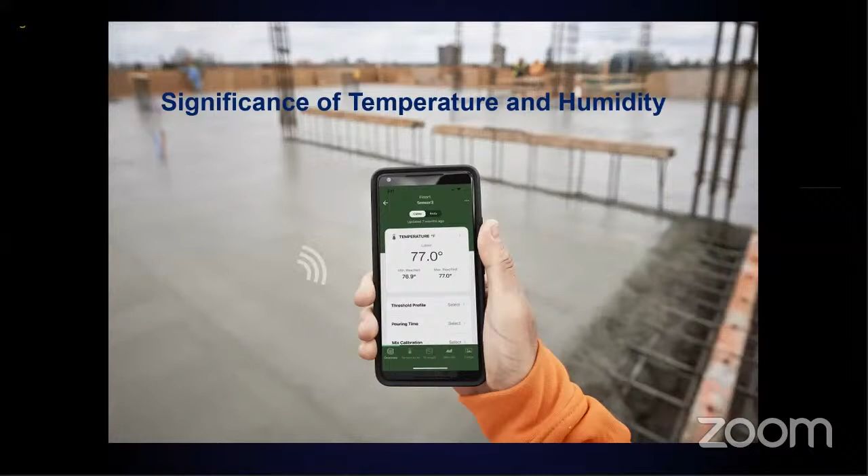So the significance of temperature and humidity for a basic civil engineer working on site is also known, because in most civil engineering projects, concrete is the key ingredient of construction. Monitoring the temperature of the pour after placement is one of the most important steps in construction. Ensuring optimal curing conditions is critical, especially during extreme weather conditions. Whenever you have extreme weather conditions, the hydration process is going to drastically affect the strength properties or the shrinkage properties of the structure. Therefore, you need to monitor the temperature and humidity.

The next point is the significance of temperature and humidity is also well known in the civil industry because of mass concreting. Because of mass concreting, there is going to be volumetric shrinkage, and because of that, there is cracking in the mass concrete due to thermal change. This is a basic definition that everybody knows. And if you don't know, you just have to Google mass concreting and thermal effects.

You know that concrete is basically a good insulator - it does not allow heat to pass through it easily, but the hydration of cement is an exothermic reaction. So there is going to be a difference in temperature between the extreme outside and the inside. Therefore, there is going to be a change in the temperature difference, and this would cause shrinkage, and the whole cycle will be different.

So therefore, there is going to be a lot of shrinkage that will cause cracks to occur. So therefore, the monitoring of temperature and humidity is a must when it comes to mass concreting.

Now, the significance of temperature or humidity is also important in sites where structures are in the most corrosive region or most susceptible to corrosion, such as the seaside, or metals and structures exposed to salt water, where the rate of corrosion is very high.

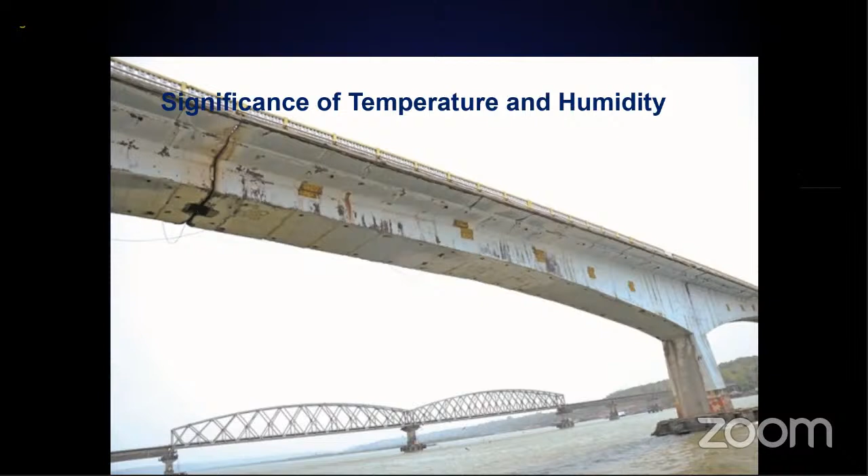But as you all know, the post-tension scheme is prone to pitting corrosion if it is in a highly corrosive zone. Exposure of metals to moisture, especially sea salt or sea water, or high humidity at high temperature, will also increase the rate of corrosion.

Now you can see the closer view. You can see the exposed post-tensioning scheme that has already been corroded. Although it has been newly retrofitted, still it has been corroded extensively.

You should also be aware that the corrosion, or the rate of corrosion, is dependent on the humidity, that is, the percentage humidity. With RH over 60%, the rate of corrosion on steel rises rapidly. That is a well-known fact. At an RH of approximately 50%, virtually no corrosion occurs.

These surface deteriorations are just some of the problems you can see across the streets of the particular country. This is because of the use of road salt during the winter, which is considered one of the major contributors to corrosion and deterioration.

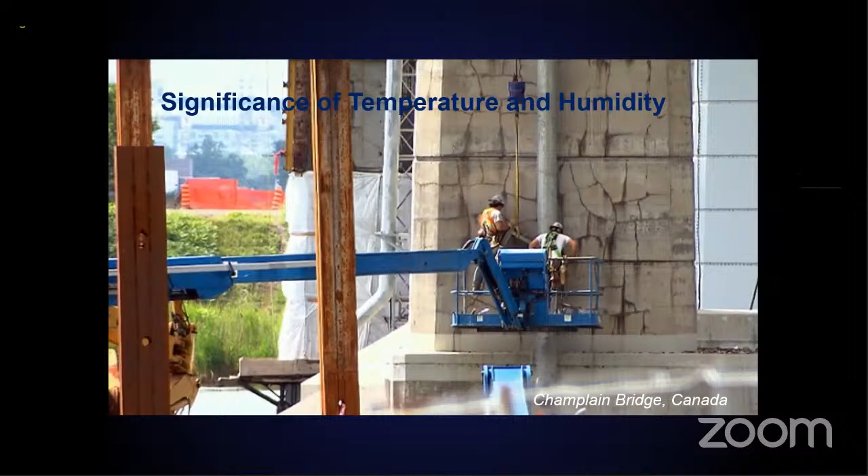If you are not taking care of these things, your sealant is not going to bond, and there is not going to be any proper effect. Therefore, temperature and humidity levels are also important when using the proper sealant.

This is because whenever the temperature is between 150 to 250, and above 400 degrees, the calcium hydroxide in the cement dehydrates and creates a water steam.

That's the basic thing. So this water steam tries to increase the pressure, and thereby it pushes the weakest section. Therefore, you basically lose out the concrete on its surfaces.

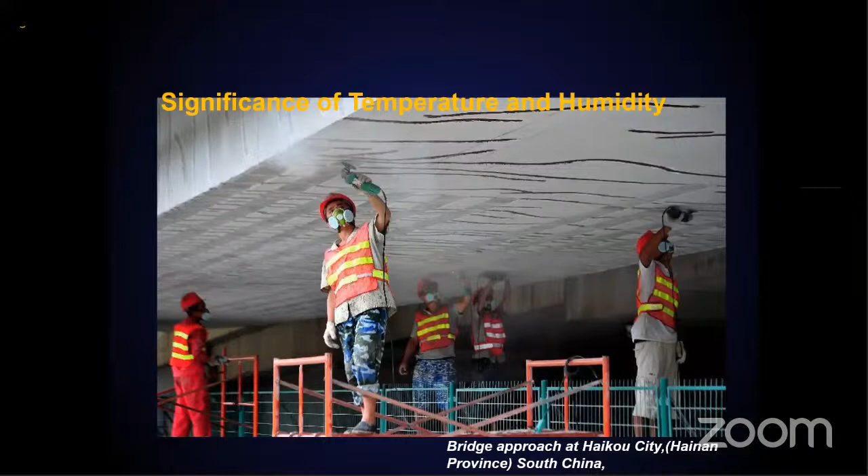So this shows the importance of temperature and humidity. If you see, this is one of the bridges in China. It was built almost in 2013, and the day it was built, there were a lot of cracks that were formed. About 200 to 300 cracks were seen underneath the bridge, and they were all superficial cracks. But there was huge research or investigation that was done.

It was found that due to the relative humidity and temperature, there were more shrinkage strains that changed because of the temperature. They concluded that the humidity effects on shrinkage is the main primary cause for these cracks that happened. That is, when the temperature rises, the moisture in the concrete diffuses more rapidly as humidity descends, resulting in larger concrete shrinkage. This was the conclusion provided from this particular study.

So we also know the importance of temperature and humidity, and I've told you about various situations now. So there is also one more situation which is a typical known major potential damage to structural elements of simply supported bridges. Extensive studies were done in the US, in Texas basically, and they came up with a report stating that the combination of clogged joint condition and unpredicted thermal stresses could actually deteriorate the bridge because of local buckling that happens, and there could be other issues related to temperature variation as well as clogged expansion joints.

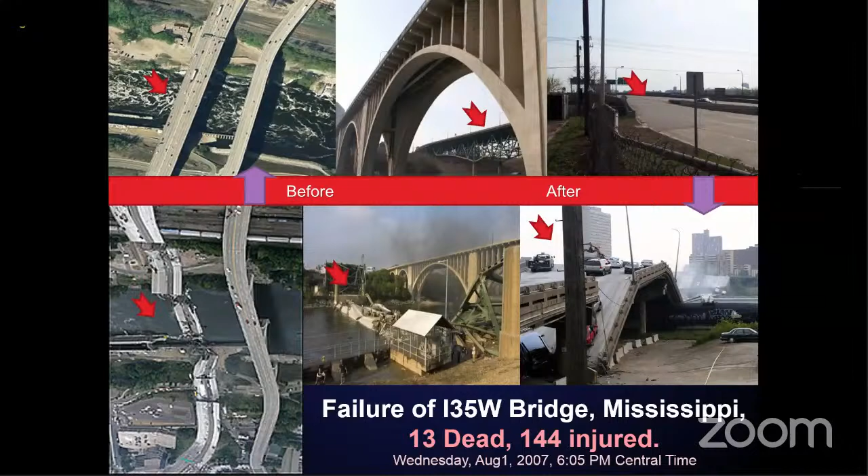This structure was already built in an era where structural analysis was developing - I'm not talking about structural monitoring, but structural analysis. They didn't learn much about this structure, which would fail because of one of its systems. If it fails, the whole system comes down, and such a structure is called a non-redundant structure. So this was a non-redundant structure.

If you look into the theory or history of structural analysis, you'll know that in 1967, the definition of non-redundant structures was given - but by then the structure was already constructed. Therefore, that definition was not known by the designers. The definition is that whenever there is a single failure of a member, the whole structure is going to fail. This structure was non-redundant because of a design issue.

The second thing is that because of the inspection and other factors, they rated it poor but not critical, because of the changing teams. They had their own perspective, their own subjective analysis of this particular investigation, and therefore various uncertainties were involved.

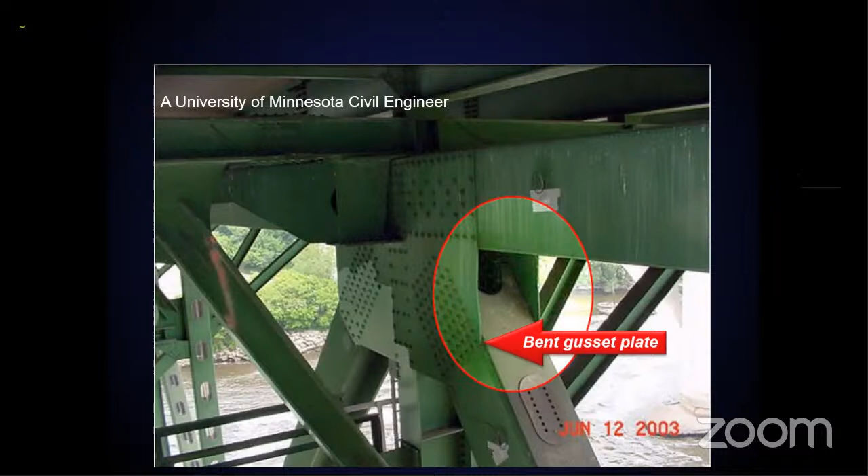As usual with any civil infrastructure, we can't easily predict failures, but we can say the probabilities of failure. The structure failed, and the final report attributed this to the bent gusset plate, and the deterioration that caused the bridge to come down. So, as you all know, ultimately we lost the bridge.

But in recent days - very recently, this month - there was a failure that occurred in one of the bridges in the USA. I'm going to go through this case study. Previously we understood that although monitoring and inspection were done properly, we still lost the bridge. But recently another bridge was investigated and found to be unsafe.

Let's look into this case study to understand the need for monitoring temperature and humidity, and why there's a need to monitor not just the parameters of the bridge, but also humidity. This is the I-40 bridge over the Mississippi River, and it was shut down indefinitely - not yet known when it will reopen - due to a crack found during routine inspection on Tuesday, May 11th.

I'm talking about this month, 2021. The day I agreed to give this presentation, I was reading the report on this, so luckily that's why I tried to formulate this particular presentation - that's why it took so much time. This is the latest Interstate 40 bridge over the Mississippi River, you can look it up on Google. It is presently shut down, and was shut on May 11, 2021.

There is a video which I can run through if there is time. Okay, let me run through it.

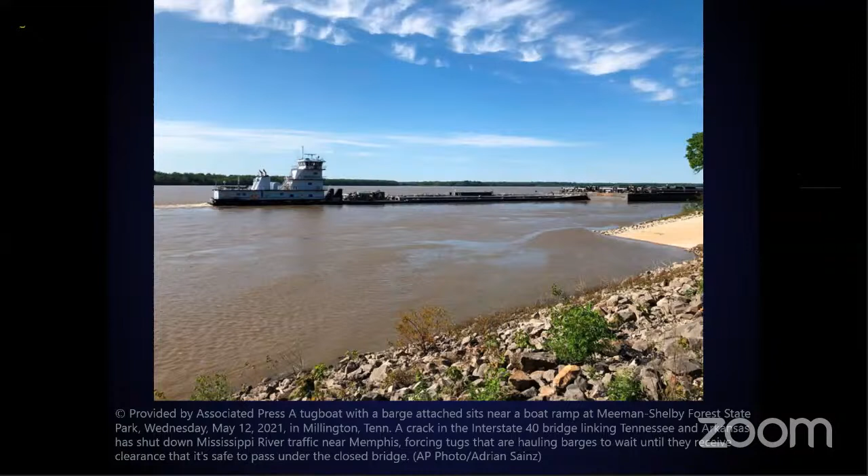Because of the initial investigation, they found that the structure had some deficiency. So they tried to close down the bridge, and everybody involved, including the coast guards, also closed down the waterway underneath the bridge. These slides show the present situation, and traffic was diverted because of the situation on the bridge.

Prior to this closure, there was constant monitoring taking place—routine inspection was done. The number of vehicles that crossed was about 41,000, and 30% of it was commercial trucks.

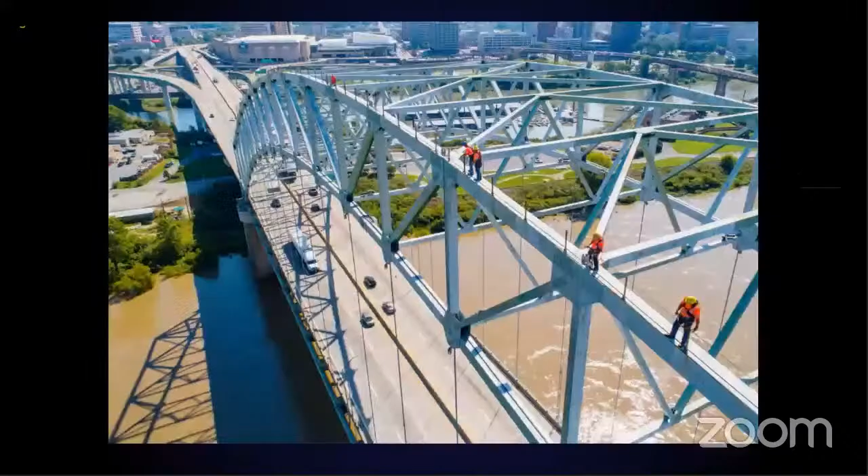The bridge was inspected regularly, and during the inspection, they found a major crack in the bridge, and it was reported. Immediately, the inspectors took action, and the bridge was locked for traffic movement. The crack looked mostly like a fatigue crack due to thermal contraction and expansion, in addition to the dynamic load from vehicle traffic.

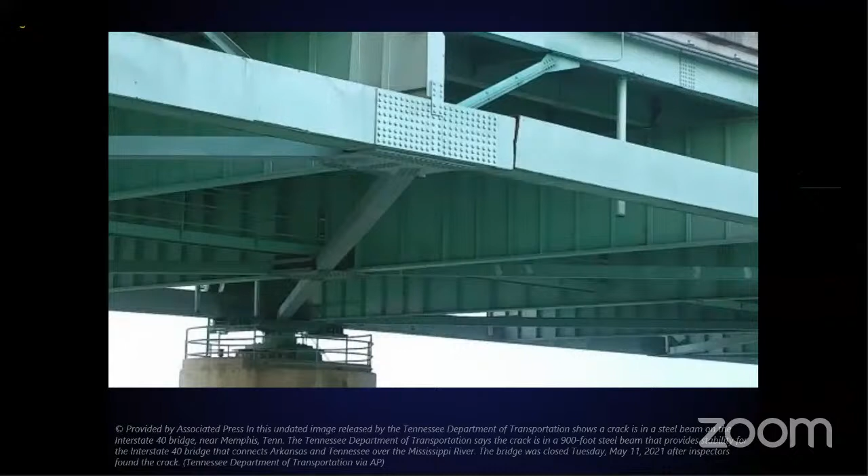One factor about fatigue development is that the fatigue crack can be initiated and propagated at stress well below the yield of the particular material. It's not necessary that it crosses plastic deformation—it could be within the elastic deformation, but it will definitely undergo fracture.

You can see here the critical beam of this particular structure was fractured and is completely sheared. This particular beam is actually a box beam—if you are bridge engineers, the reason why the box section is provided at this point will give you a clear idea. This particular steel box is cracked, completely sheared, and broken into two halves.

The critical beam was fractured very close to the support. As you can see, there is a joint—you can see here there's a bolted joint, and there is a crack over there.

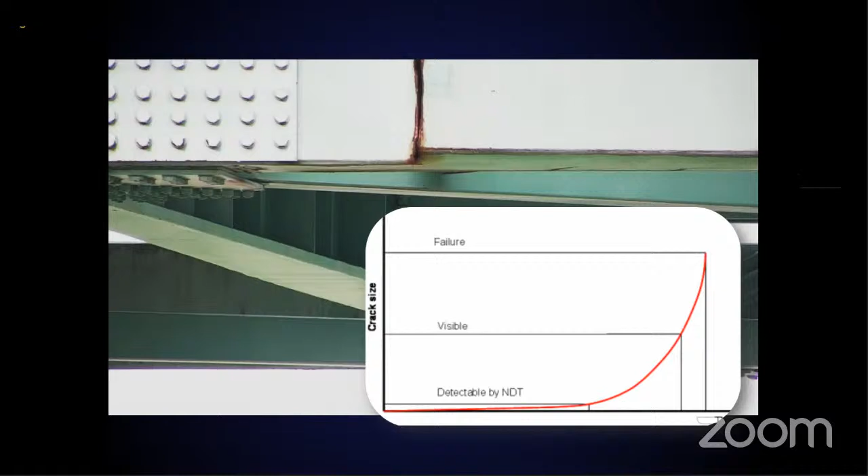If you can see from the photograph itself, it gives you a clear idea of the extent of the corrosion that has taken place and the time it would have taken. You can see further closer, these are the cracks, and this is the dimension of the crack—so you can understand the importance of this being closed.

There are several factors that influence fatigue strength, including the range of stress—dynamic stresses and the geometries or static reversal stresses. The geometry of the component is very important, and the material property and environmental factors are very, very important key points. For fatigue properties, what a designer basically does is increase the thickness of the component to make it fatigue resistant.

But you should also note that increasing thickness can result in failures being brittle rather than ductile. In most civil infrastructure, we expect ductile type failures—that's why we go in for under-reinforced structures. That is a note you should keep in mind.

From my experience and various situations I've gone through, I've understood that numerous investigations indicate that temperature is a critical source causing the variability of vibration properties. Most of the vibration studies I've done on bridges show that modal properties are not just influenced by loads, but more influenced by changes in environmental conditions such as temperature.

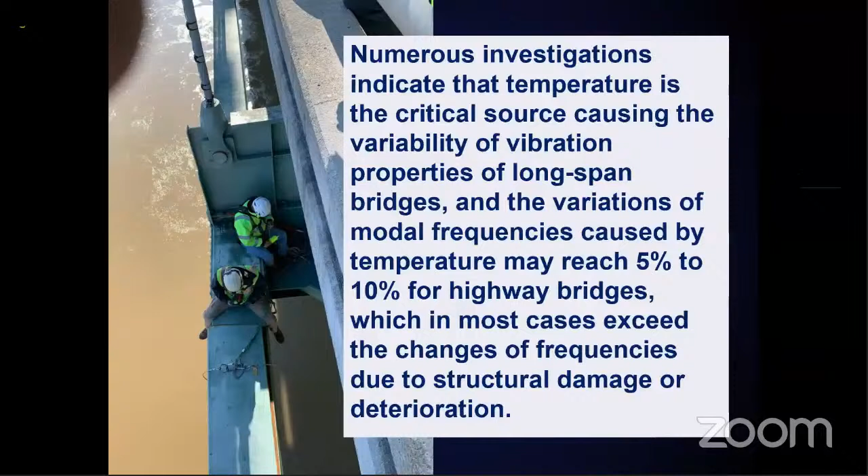So even if there is damage, it cannot be easily captured by these sensors or structural monitoring schemes, because the change in the variation of modal frequencies due to temperature itself is going to be quite large. This shows the importance of performance assessment, and the importance of temperature and humidity—we saw that temperature and humidity also have to be monitored for any type of situation like this.

So understanding this, taking the failure studies, we have understood the importance of temperature and humidity, and therefore we'll look into two of the projects that I've done. I'll run through the slides.

This is a project in Mangalore, a steel bridge with a similar situation. We were given the site to install some sensors and monitor, because their objective was different. But what we captured was quite astonishing, and I gained complete insight into structural health monitoring. This was one of the first projects where I made silly mistakes and was able to understand better.

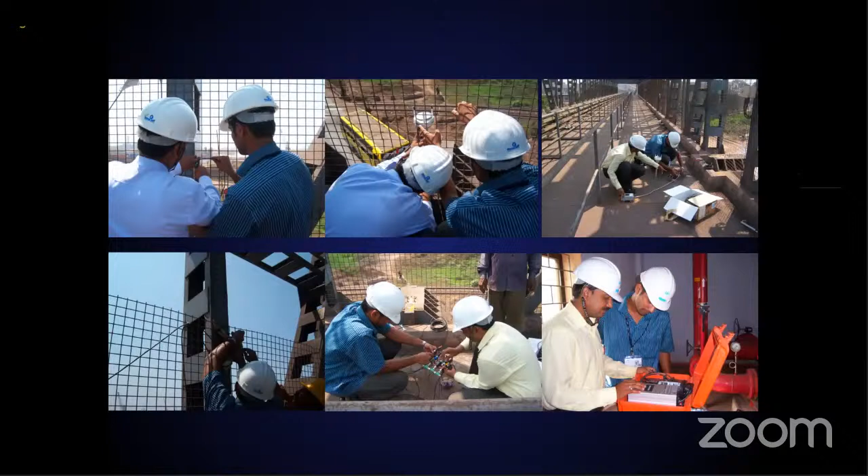You can watch him. On this particular bridge we installed various sets of sensors, but the importance of what we were told was just to monitor the strain. But knowing the subject, what I intended to do, you can see that I'm monitoring a weather station here.

I was asked basically most of these questions by most engineers in those days, I think it was around 2009, when I was installing this first sensor for temperature and humidity. You can see here I'm installing the temperature and humidity sensor, the surface temperature, and in the next slide, if you can see on the laser, here I'm installing the structural temperature sensor.

This is the surface ambient temperature, and this is a weather station. This is a tilt meter, and we have various strain gauges that go below this joint. So these are the sensors that we monitored.

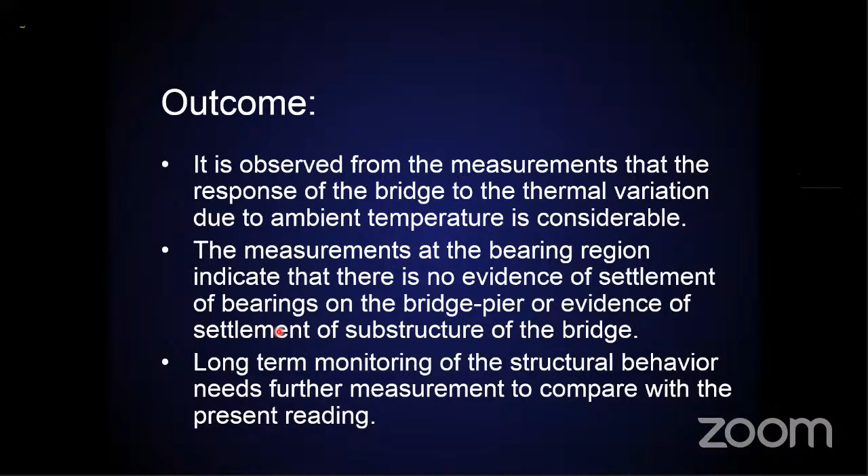Now, the measurement at the bearing location though, the objective was quite different here. I'll skip all those objectives. We also said that it needs to be monitored for corrosion and the impact of being located in the corrosion zone.

We need to also monitor the temperature as well as the humidity continuously. So basically we also updated that the design of structures is quite complex, and the influence of temperature is one of the essential factors in the design process. Such temperature stresses due to temperature variation have great impact on the structures.

As we all know, whenever we design a structure, we use uniform distribution, whereas in reality, because of the non-uniform temperature gradient, there is going to be major change. As you saw, there's going to be stressing and strain happening, and fatigue is going to happen, and therefore there is going to be maximum changes in the structure.

So this is rarely considered in the details. We also updated the designers, I think these people are Jacobs. Most analysis assumes a uniform temperature.

As I said, the difference between site experience and the calculated temperature stresses in the structure is very large. The design method may lead to an unsafe design. This was the conclusion we provided. So basically, we also emphasized the corrosion point of view.

We also emphasized the inspections that need to be done regularly because of anticipation and experience. You saw already the bridge that was monitored failed without any notice, and it was visual inspection, not sensor-based inspection, that was able to find it. As I said, the fatigue failure was not because of traffic loading, but because of temperature.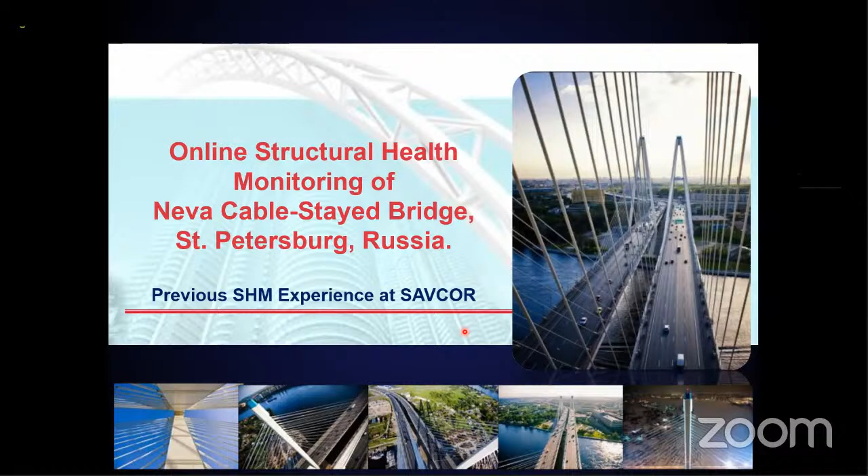The next situation is the online monitoring of the Neva bridge. This project was allotted to us from the commission, from the construction stage to the present day. It is located in Russia. This is a dual bridge, a steel twin bridge, and because the twins are close to each other, the aerodynamics is quite complex, so an aerodynamic study was done. These are the designers of the bridge, and the span and geometrical details are provided here.

This is a beautiful bridge, worth watching. The traffic has 4 lanes on each bridge, so one-way traffic on each. This bridge is quite complex aerodynamically, with a coupling effect between the towers, since the air passes between them, and this aerodynamic coupling has a major impact.

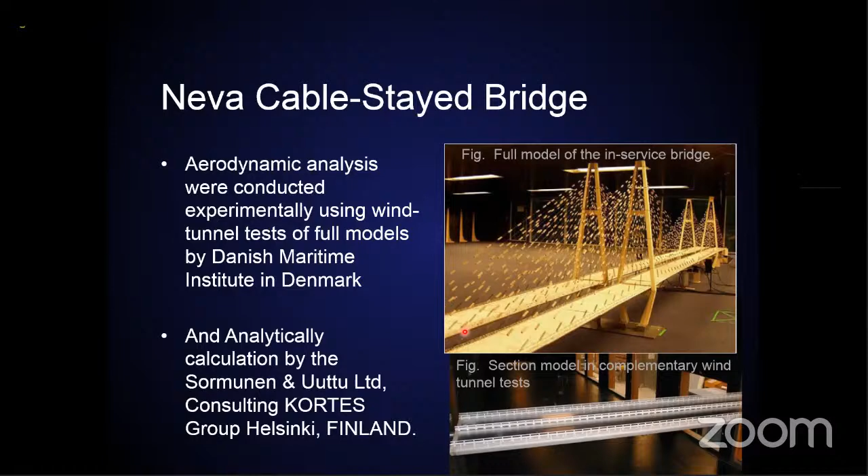Therefore the analysis had to be done using a wind tunnel, and the same had to be monitored on site. Because of the temperature in Russia, which ranges from minus degrees to the highest degrees, it had to be constructed on a tight schedule, for which steel structures were chosen.

As you know, when you go for steel structures, they are lightly damped, and other issues come up with lightly damped, slender structures - the dynamic nature of the structure has to be understood. The aerodynamic performance of the deck needed to be understood, because the design was done to satisfy aerodynamic requirements, so the dynamics is quite different.

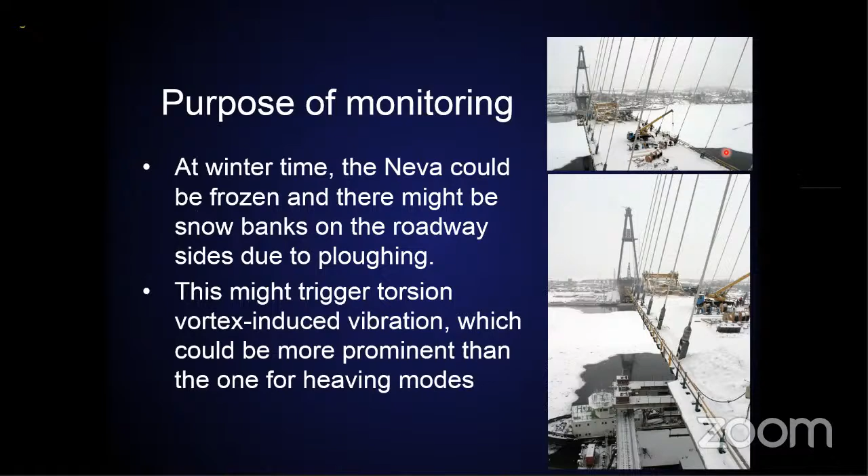During the construction, there was the worst snowfall, which was not anticipated even by the designers. It caused the worst loading onto the structure, and because of the monitoring, they were able to trace out how much stress was getting into the structure.

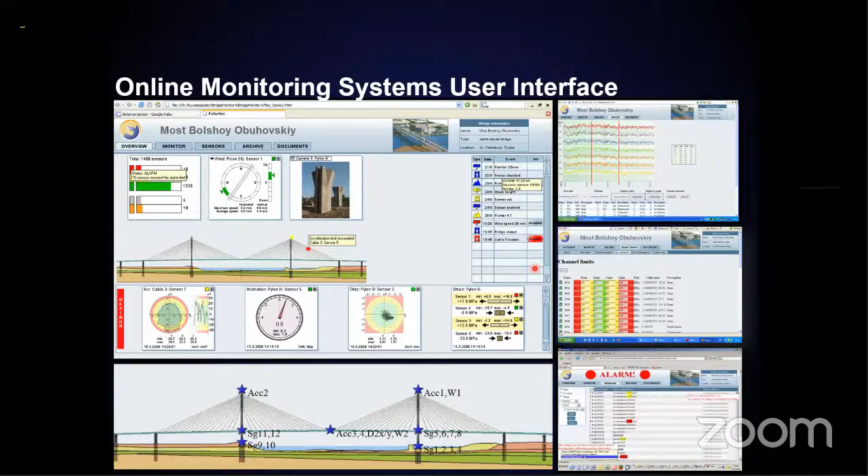This complete picture shows the layout of the monitoring scheme that was provided, in which I was involved along with various other projects. This is an online monitoring scheme given to the user, in the simplest fashion, so the experts or decision makers can look into it and take a decision. There are various web pages, or sub web pages, that could be opened to see what is happening with each of the sensors.

So what are the findings here - being a very large, long span structure, the temperature and humidity are very important. The variation of temperature affects the vibration properties of long span bridges, and this is very complicated, which you should note.

Firstly, the temperature distribution and variation are generally non-uniform and time dependent, including the change of physical parameters along different parts, and it is going to be completely asynchronous. Secondly, all the members of the bridge change their size under different temperatures, and the contraction of each individual member is going to be different.

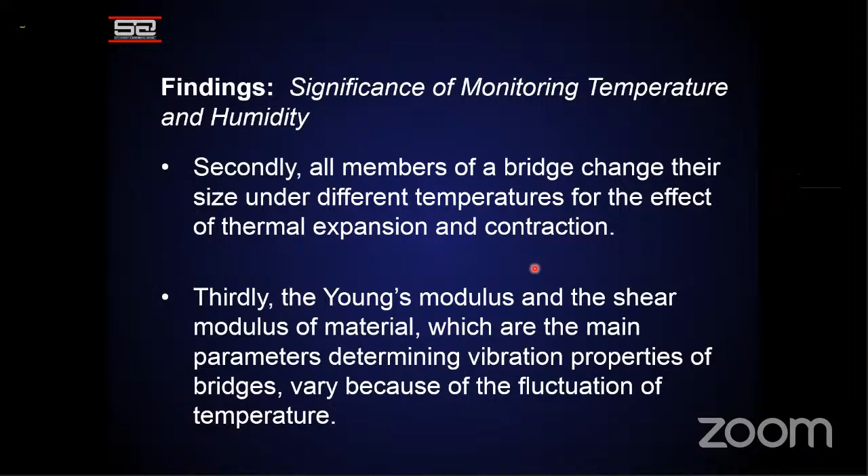The third factor is the Young's modulus and shear modulus of the material, which are the main parameters determining the vibration parameters, and these also fluctuate because of the complex nature and complex system of the structural formation. Fourthly, daily and seasonal variation in temperature may change the stiffness of the bridge joints and supports.

This strengthens or weakens the constraints, resulting in an apparent shift of the vibration properties, or sometimes we don't get the true properties if we're just monitoring vibration alone, since temperature and humidity play an important role. Lastly, temperature variation results in considerable thermal stresses or stress redistribution in the structure, which changes the vibration properties of the bridge.

As I said, this particular case study indicates that temperature is a critical source causing variability of vibration properties of the long span bridge, and variation of modal frequencies caused by temperature in most cases exceeds the changes of frequency due to structural damage or deterioration.

We also indicated this, and through monitoring we found there was no problematic action due to wind, and the fundamental frequency was within the expected order of what was calculated. It did not become an issue because of wind speed and other parameters - in the real scenario, there was no resonance that was caused.

So this was the finding of this particular project. This SHM technology, structural monitoring technology and system, has been developed to facilitate sustainable development through improvement of the knowledge base, reliability, and safety in the design and asset management.

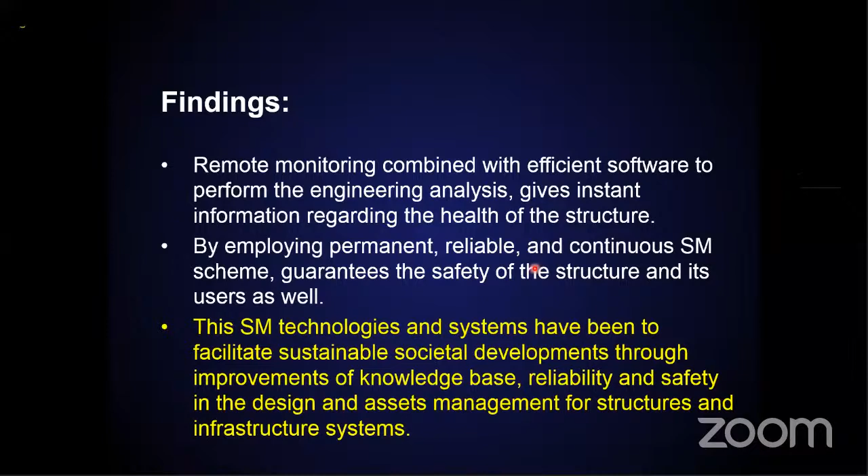For structural infrastructure, this particular data is presently monitored by the Russian Ministry of Emergency, and the data is utilized by various academicians and related people who have been developing the knowledge base. So here are a few closing comments before I close this presentation.

From this presentation, you should understand that structural monitoring technology is the inverse process of structural design and verification, reflecting the variation of structural material parameters and geometrical characteristics, which change structural response due to various environmental factors. Many field monitoring data indicate the structural response is not only related to the characteristics of the structure, but is also highly susceptible to environmental conditions.

So you know that most of the monitoring cases we have seen are highly susceptible to the monitoring environment. Basically you have three cases in basic engineering: output analysis, input identification, and system identification, or structural identification.

In structural identification, you have the unknown parameter being the structure, and you know the input and the output - meaning you know what type of input is going to come into the structure, and what type of output is going to come from the structure.

If you have this, defects in the structure will inevitably change its dynamic characteristics, and these changes may be detectable by dynamic loading and sensors. So whatever defect happens in the structure can result in changes, and these dynamic characteristics can be detected by the structural health monitoring scheme.

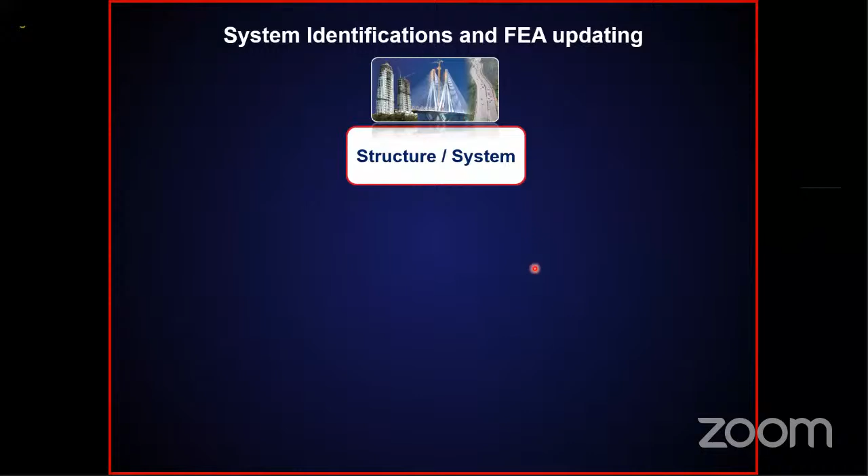Obtaining accurate dynamic characteristics and developing an accurate theoretical model to study the performance is perhaps the most challenging part, and in this case, structural health monitoring schemes help.

Basically, you take an input source, such as free vibration, forced vibration, or ambient vibration, and your structural system is completely equipped with a structural monitoring scheme. You get the dynamic response, and through dynamic data analysis or big data analytics,

you check out what is happening with the data, and try to extract the features, or do a statistical assessment of this data to get the features of the trend that is happening because of the data.

And therefore you try to develop a model - basically called system identification, which is a methodology for building a mathematical model based on the system dynamics using the measured data of inputs and outputs of a signal. So you have the inputs and outputs of a signal, and you develop a model, and this process is called system identification.

Since this identified system is closely related to the system in reality, you get to understand the future performance of a structure if you use these updated models in your analysis. Now, this is the scenario we are presently in, which is the base for system identification and finite element model updating.

The future response of the system is studied for damage assessment and critical condition based on the data using the SHM system. So you have the system in place, you have already updated the data in your software. That is, you have updated your model using these data, and you have got a reliable FE model. You try to input the present day situation in real time and get back what is going to happen progressively. You can also make a detailed study that encompasses various uncertainty, and basically you will have a more reliable understanding of the structure.

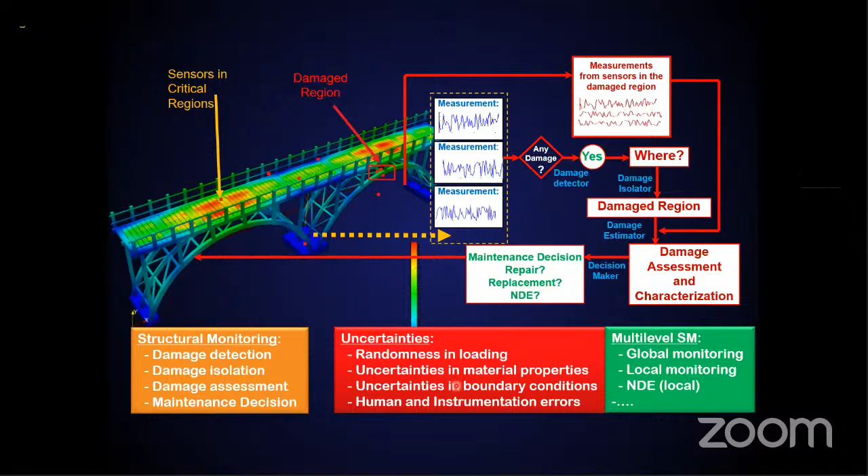Basically, in summary, there are 3 stages of SHM. You acquire the data using the sensors and acquisition systems. From this data, you develop a model, or the dynamic model, and that's called the system identification, done by data extraction and feature extraction. From the data, the model that is being developed, you input the sensor data, and you also get the condition assessment using the damage updated model, as well as inputting the realistic sensor data or future data onto the model, you get the condition of the structure or the performance of the structure.

So as you all know, the present day effect of the change in environmental condition is going to change the dynamic characteristics of the bridge. Basically, temperature is the most challenging aspect of present day research and has presently attracted most of the studies. If you just Google the present day studies on temperature effect onto various domains, you see most studies are done on temperature effect as well as change in climatic conditions. So therefore, temperature plays a key role.

And as you know, the structures are quite large, and absorption of heat is going to be high, so it depends on various conditions. The heat exchange between the boundaries of the bridge and the environment itself is complex. It depends on solar radiation, convection, and thermal radiation. Solar radiation is one of the most important things, and it depends on various parameters: the inclination, where the bridge is located, the orientation of the bridge, the solar declination, and so on and so forth. You can look into these details on the thermal effects on civil infrastructures - there are various literatures on it, so it will give you a fair idea.

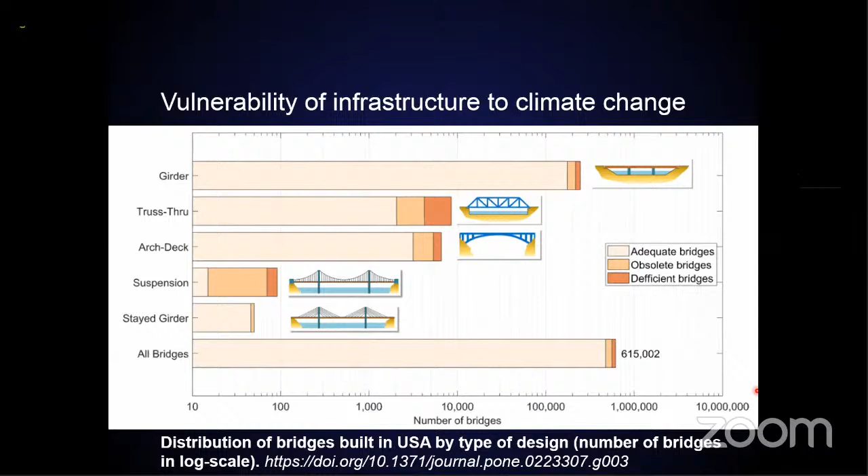This is the scenario presently in the USA, because the data are available. So the vulnerability of the structure to climatic change is quite an important topic, and this has attracted most researchers. Today we are in a state wherein we are not just monitoring only the data of importance, but we are also monitoring the data as well as the other conditions that affect these.

This particular technology - the temperature-based system identification and temperature-based structural health monitoring process, or temperature-based structural monitoring - is presently being accepted and is being practiced. But all this while we were doing it without looking into those fact checks. Presently it is already well developed, and there are a lot of algorithms already developed, and people are looking into this data.

From the temperature-based system identification and the temperature-based structural monitoring, the measured values are just the temperatures, temperature gradients, strains, and displacement - nonlinear and linear analysis of the measured inputs and responses based on the characteristics of the observed value - and the final target of this structure identification.

So prior to the finite element updating, basically what you do is you monitor all the parameters of temperature, environment, temperature gradient, stress and displacement, non-linearities and linearities, and you observe the trend. Then basically you try to develop a system or model using these temperature or environmental condition based inputs. This is already in books and literatures, and it is already into various studies in well-developed countries, as well as where people are extensively using structural monitoring.

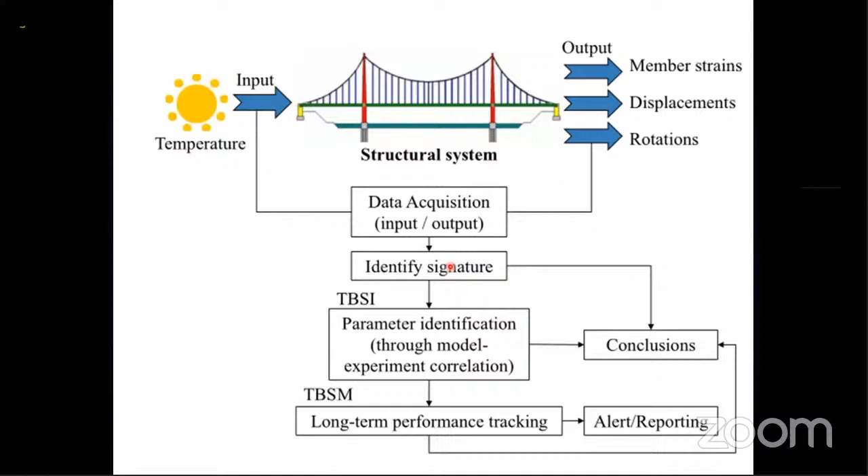So presently, this is the present day scheme that has been extensively used. As I said, I emphasized on the environmental temperature and relative humidity. This is the input that is also taken care of by the structural system. Then you get various types of responses, you acquire the data, you identify the signature. Using the temperature-based or environmental condition-based system identification, you can develop the proper model. By continuously monitoring further, you can see the long-term performance of the structure, and therefore come to some conclusion. This is the present day trend that is happening, and that is real - everybody is going with temperature-based system identification and temperature-based structure monitoring scheme.

So in conclusion, the data and information obtained from structural monitoring scheme offers several contributions. This includes: the result can be used to evaluate the safety and serviceability of a bridge by comparing with the design criteria. The results can be regarded as a set of reference data serving to eliminate the effect of environmental parameters in evaluating the condition of a bridge. As we all know, for example, in assessing the effect of traffic load, the temperature effect should be removed from the original measurement. The quantitative effects of environmental parameters on structural response can be employed as a damage indicator.

If in case you can see that the expansion joints or the abutment is completely or partially restrained for longitudinal movement, the measured displacement will show different parameters, so we know this very well.

So I thank you all for your patient hearing. It was quite a vast topic that I had to cover, and since this was a COVID situation, I took the opportunity to put all the information that I had gathered over a period of time with my experience, as well as with a lot of reading and looking at present day articles, including the traffic that is being closed on the I-40 bridge. I had to put it in place and present it in such a way that it's quite understandable by most of you during this online presentation. I hope that my presentation was quite reachable to everyone and understandable. I thank you one and all for your patient hearing.